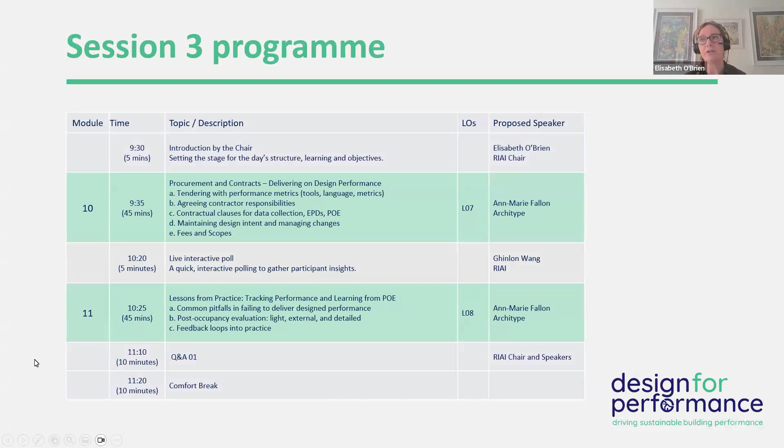Review assessment methods and deliver on building performance, and we'll conclude with a panel discussion on our next steps. You'll see the short agenda on the screen.

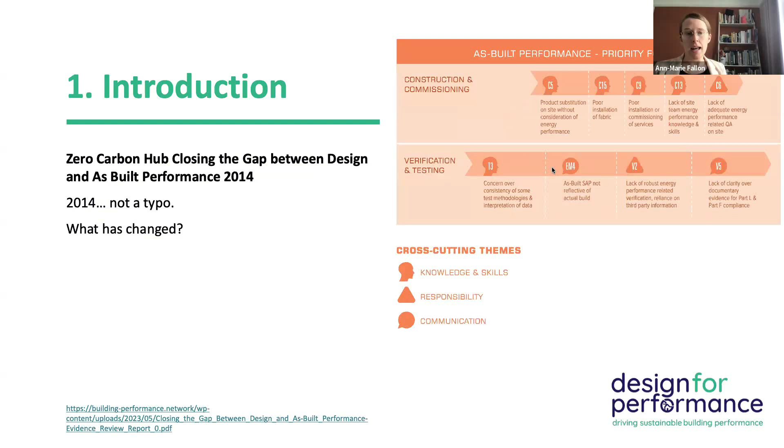The Zero Carbon Hub produced a report in the UK way back in 2014, which feels comical actually that now we're 11 years on and most of the same issues still exist within our construction industry. I won't go into detail on all the actions here, but it's a really useful report and scene setting.

It goes through several different topics that we will mention and run through today in terms of practical application. And interestingly, the areas that they prioritised in 2014 for research, there has been research, there is evidence of better building, better performance, better workflows now, but we're still seeing a lack of execution of that on the delivery side.

So, do performance metrics affect tendering? I'm sure in the big group that's listening this morning, there's going to be a variety of opinions and probably experiences of that. I'm going to be a bit controversial with mine.

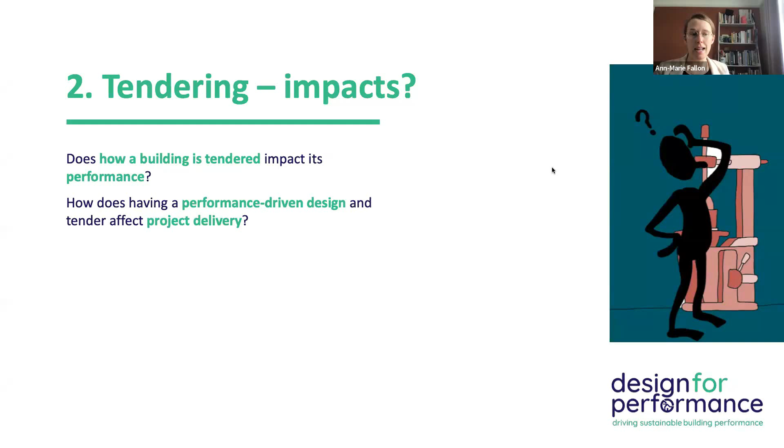You know, how a building is tendered, does that affect its performance? And how does having a performance-driven design and tender affect project delivery? I don't believe the tender procurement route necessarily affects performance in a negative way. The quality of the information we put together for that tender and how informed and collaborative we are ultimately is going to impact how that building performs.

The answer to the second question is also a positive one, which might sound quite controversial, but having performance-driven design at the center of your brief and creating that certainty as a client and as a consultant team gives confidence to the contractor and gives confidence to the execution element of the projects. And I believe you would have seen some examples of that in the last session.

Of course, this is an ideal world. There are challenges, and we'll run through some of those.

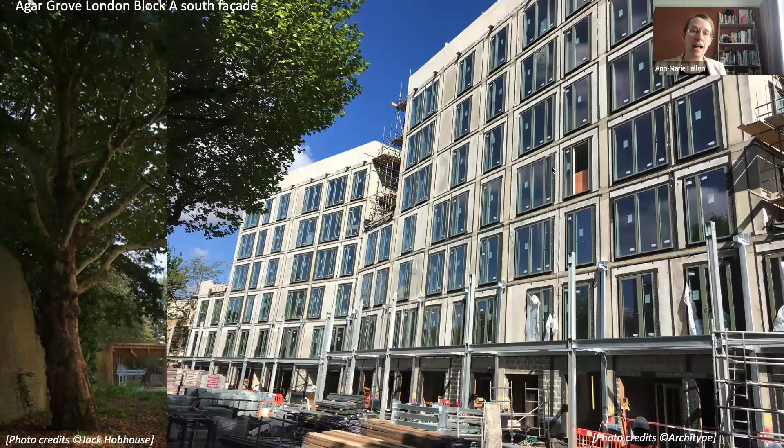Just coming back to Agar Grove here, I guess what's really interesting is, yes, you'll have the projects that are delivered and occupied, but behind the skin of those projects, this particular facade, the south facade on this block, had 7 to 8 subcontractors coordinating between the facade line, which is the thermal line, and the walkway, which was the kind of amenity area for balconies and terraces.

There were lots of panel sign-off protocols per level. There was thermal and fire performance continuity mapped across the project as well. This project was developed through COVID, Japanese knotweed, Grenfell, a lot of contractual issues thrown at the project as well as the performance targets.

And other elements of high performing buildings like the air tightness layer here and windows, etc., all build into that complexity of delivery and execution.

So straight into really, how can the client and design team create that great platform for then the contractor to come along and deliver on his obligations and responsibilities?

It might sound very obvious, and this might touch on some elements from the last session, but trying to make the energy target really explicit in all the client documentation. Where we find building performance fails and building targets fail in contracts and tenders and procurement is when the documentation is either not fully committed or there's an element of something referenced about energy in one place and it's not really followed through comprehensively through the rest of the documentation.

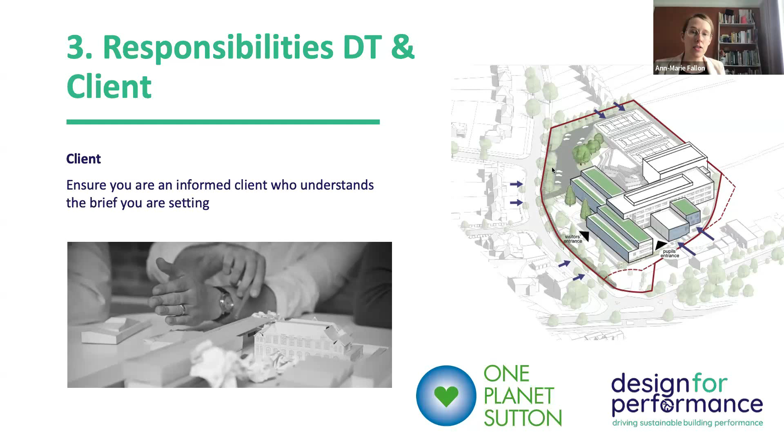And it was our first secondary school at that scale as well, about 8 and 9 years ago. So it was quite novel for all of us, but the client was so important in making sure that we were able to move forward with certainty.

Another area that's really important is around consultant appointment. We're in an infancy of where we're designing performance of buildings, and the framework that SEAI and RIAI have set out is there to help and handhold through that process. But we can deliver these complex buildings with teams that have not done it before. We've delivered many buildings with tier one contractors that have never done it before. It's all about the right approach and attitude and getting set up in the right way.

It really comes down to having a willingness to look across discipline and understand how M&E services engineers aren't just a tick-the-box service that comes in at the end of the architect's design. They're actually there to iteratively design your facade, for example, and look at how we're dealing with ventilation and comfort in the building. That is something that as architects we need to engage with, and they need to be able to step in on.

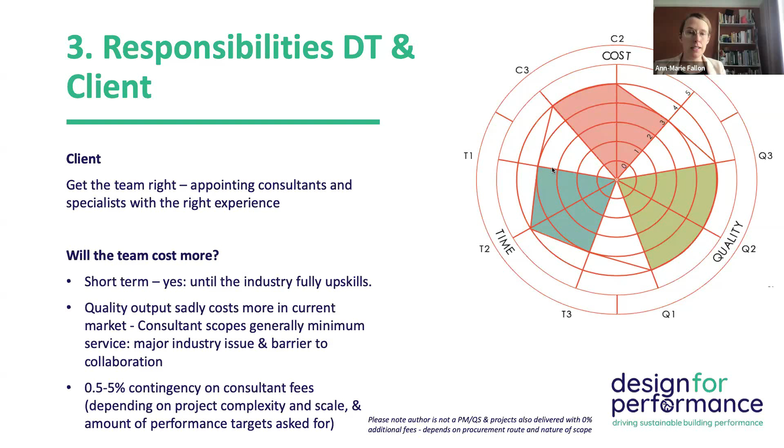So being accommodating, having that in your back pocket as part of your overall budget planning for a client, make sure there's no surprises, and you're informed about the complexity and scale and how much that percentage might affect you. And again, we're talking about consultant fees, not the overall project cost.

That said, having those contingencies, knowing what you're asking for, is so important to clients in relation to the contractual relationship when it gets to site. I've seen clients who've just entrenched themselves back in the business-as-usual historic position, which is: the contractor is going to be very nasty through this process and we need to protect ourselves and not really collaborate or engage.

Whilst maybe the start of the project started out very well. The best projects we've been on, whether they've delivered on energy targets, but the relationship with the client can be very different across project types, involve a client who has that openness and allows that contract to stay in the filing cabinet a little bit longer.

That generally, depending on the attitude of the contractor, which you should know through a very good tender and vetting process, generates how you might be able to best manage risk, intervention, or variation collaboratively. So just trying to keep the goals clear and keep that openness going as much as possible.

Some clients, and potentially design teams helping clients put information together, can be a bit nervous about committing to too much technical information in the tender. The more the better—getting in information about how you might imagine sequencing happening, air testing, the expectation around mock-ups.

Equally, these are things you might score or mark in a tender process when contractors come back to you with a return on tender. Making sure, again, they might not have delivered passive house, but maybe they delivered labs in a STEM context somewhere, so they know about quality assurance within a different type of approach.

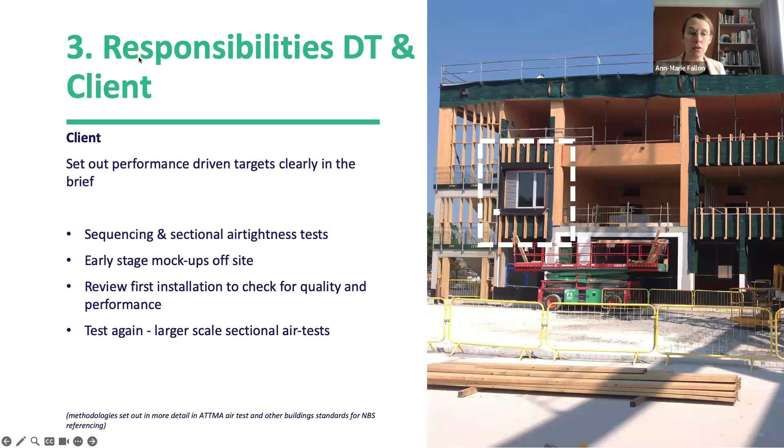Having evidence requirements, collating them, really reinforcing that cyclical approach—just a little diagram here showing that—allows that process to become a lot more collaborative and cyclical.

The start of every project does need to be generated from that in-use and 360 review that we generally have at the start of projects before we move on to the next stages, and trying to involve the whole design team and client team in that is really important.

And finally, for a client, locking in building performance evaluation. We'll talk about this more in the next session, but it's really powerful, and we can see the Scottish Futures Trust in Scotland have connected energy performance measures and targets with outcomes-based funding.

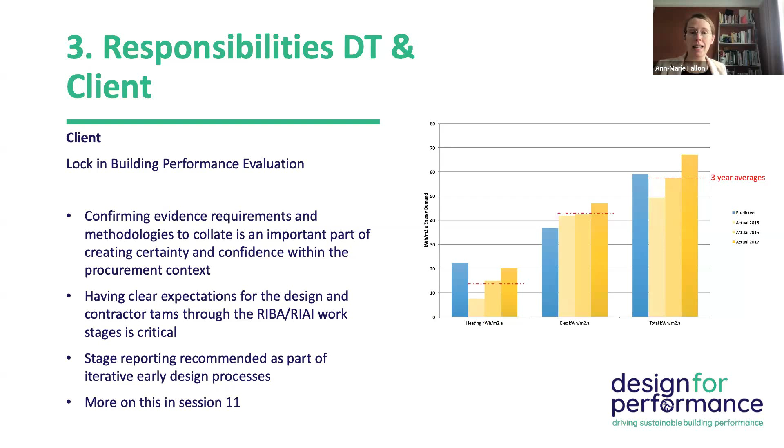So they don't get the capital funding for their schools upfront anymore. They get it over a 25-year period where the buildings have to perform to certain energy and other funding metrics, and post-occupancy evaluation is locked into that. Clients must provide that as part of drawing down that funding. So we're seeing clear mechanisms brought in so that buildings perform as designed by year 2. So just a bit of a summary.

We've talked about explicit targets, trying to have an informed client, and that can be very difficult. Sometimes we're lucky with really informed clients who know how they're spending their private or public sector money. Other times we're dealing with people who are a little bit remote from the technicality of the process. Especially at this early stage of driving through this change, it's a duty to really engage, collaborate, educate, bring people to sites, bring clients along, and get that engagement—it helps the collaboration the whole way through the project. The design team.

Coming back again to scope of services—so with the client to set their information up as best they can, how are you responding to that? I guess it's a topic architects debate quite a bit, how we present and replicate information, the cost and time for that, and how we contractually become implied within what we're showing at different work stages.

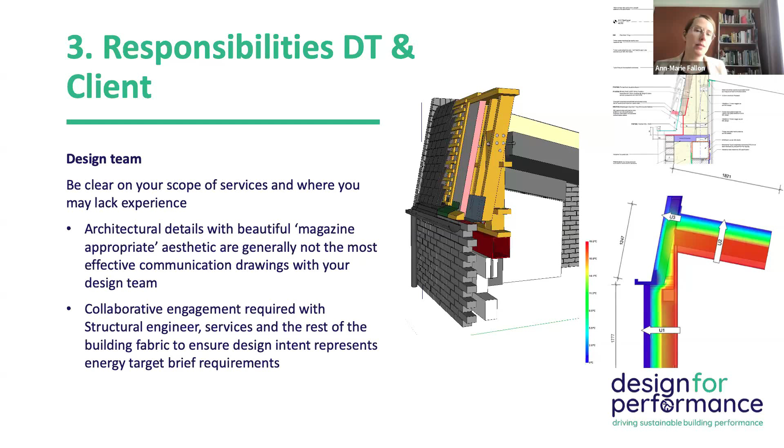Maybe if we had engaged in some modeling a bit earlier on, or were able to do some 3D mock-ups digitally to demonstrate the complexity on site, and if we had the right people around the table—which at this particular point we didn't—it could have made an impact. So again, being really clear on what we're actually providing at different stages. That extra thermal modeling wasn't in our scope at the time, but with our Passive House designer scope, if that had been sorted on this project a decade ago, maybe it could have been drawn on in a more collaborative way.

Design team as well as the client—when we're working on these projects at the very beginning, there are many consultancies and different experts across Ireland now, particularly because of NZEB and the Part L regulations being slightly ahead of the UK in a lot of instances, so there's experience within the fields we're working in. Even if, as an architecture practice or consultant practice, you don't feel you have the experience in-house, for those first few projects look at it as a bit of an investment to bring in and develop relationships with some of those consultants.

So really trying to think about, from the very first beginnings, don't just get a consultant in to do a tick-the-box exercise. Bring these designers, bring environmental designers in as early as possible, or develop them in-house, to ensure you're making the right early stage decisions that don't allow for these impacts later.

I'm just showing this in terms of free information available. I was with Joseph Little Architects many years ago now, and just as a performance target around retrofit was developing with the Passive House Institute, we maybe naively committed with this client to delivering that developing performance standard as it was evolving out of Germany at the time—the EnerPHit, Passive House EnerPHit standard.

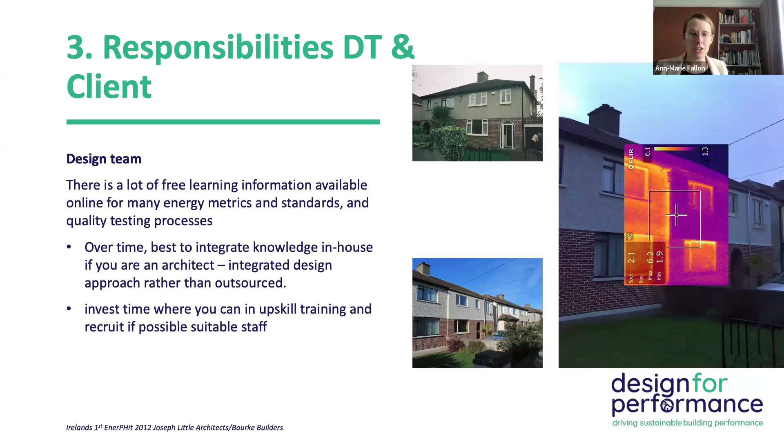It's absolutely not a barrier, and since 2011, 2012, there's so much more information online, and the curriculums are changing. I can see in the UK moving towards more energy conscious building physics undergraduate curriculums, particularly in architecture. So that kind of 2010, 2011 Part 2 assistant architectural graduate is a lot more informed now.

So just to summarize, being really clear on the scope of services, looking for that experience to complement your experience, and trying to avail of the training and learning that's out there, I think is a really good first basis. And we can talk about some of the technicalities of how that runs through in quality and contractor sections.

Again, novel project, inexperienced contractor, mostly inexperienced design team. Lots of really ambitious energy targets. So it did feel a bit tick the box with WELL, with BREEAM, with Passive House, and all of the other bio-based and low embodied carbon targets the building had as well, and reuse and circular economy.

So it was a very ambitious brief, but really understanding where the brief was and who had primary responsibility for the different elements of the brief in a collaborative way was the success of that project really.

And there's lots of information. University of Cambridge have open source lessons learned on costs, on the sequencing of this project, and how the teams collaborated, all online. I'll try and pop it in. I'm sorry I don't have it in this slide at the end of the presentation.

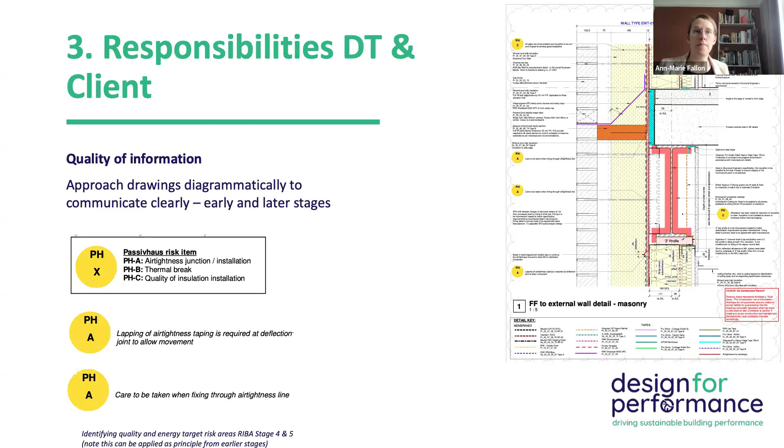Sequencing. Again, I've had a debate with architects in the UK: if you can't draw detail in 3D, or your team can't, how can you expect the contractor to build it? And whilst, in a D&B context, we're handing over that responsibility to the contractor, having a set of sequencing drawings is a really collaborative way of approaching their supply chain with the main contractor and saying, right, we think this is going together like that.

Here's our detailed drawing. What do we think? Whose responsibility are the different layers? And actually, is there a better way of doing it? Because sometimes that can come back from the supply chain and it can save cost and time.

And I'm not saying radically change the intent of the detail. The strategy remains the same, but there might be a sequencing change that facilitates everybody on site.

And also with our NBS, we have a specific passive house or particular energy target prelim set within that NBS that's referred to and coded on our drawings, within the world of BIM and information management, that allows everything to be coordinated and tagged across, so that there's no excuse for any package to be procured by the main contractor that their supply chain is not aware that the passive house or a similar energy target is required on the project.

So explicit targets, bringing people along in a series of workshops, setting that charter around quality of information and who's showing what. Designing with services in mind - we'll come back to services as we go through - and how we interpret and deliver on information is really important, and how much we actually show it.

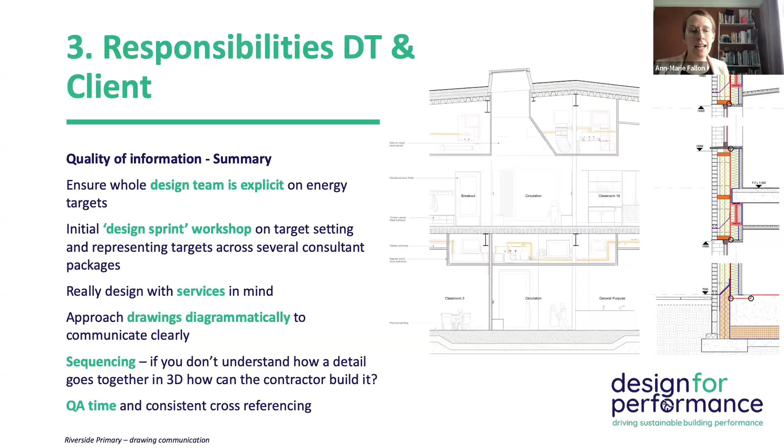So I just have two quotes, one from a report and one controversial one from a contractor, and it depends sometimes on the day whether I agree with them or not. So I'm not saying this is...

true for everybody, but tier 1 contractor - the responsibility of a successfully delivered high performance building is 80% the design team and 20% the contractor, after delivering several passive house projects with several different consultant teams and clients.

And I guess as an architect, I'm a bit upset at that - of course I'd like that percentage weighted a bit more towards the contractor. But I do really believe, if we can give the foundations as the design and client team for clear information, really clear targets, really informed collaborative working relationships, that the contractor is really just executing what is a really good pack of information, and quality and execution should be his remit in terms of how good that workmanship is.

But we know the balance can be very different, and sometimes the design team maybe isn't quite at the grade A level of delivery or experience, and the contractor is taking on that little bit more risk in the building information. I think we'll find, as we move through the first major projects towards 2030, that we're going to have to develop that relationship to better understand what that contractor needs and what, of course, you're being paid or scoped or assured to deliver.

And of course they're quite important topics - again, I'm not pulling out the Hackitt report here, but the Cole report on school quality, or public sector building quality in Scotland - the irrefutable evidence that third-party certification of construction is really critical to reinforce quality.

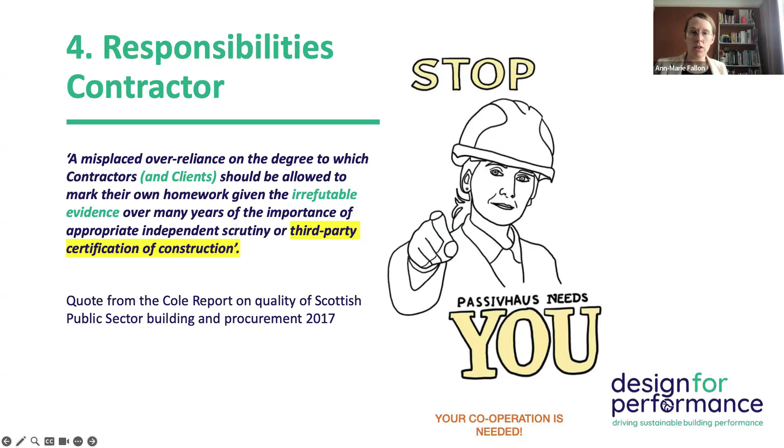So we're seeing the impacts of that come through now on a performance-focused basis. And in Scotland at the moment, they're looking at a passive house equivalency for domestic and non-domestic buildings to be rolled out by 2028 within their building regulations. The idea of certification is something their building standards are trying to work through - how can the building control teams take on some of that performance-driven assessment alongside their other requirements?

So the few things I'll talk about through this period is what contractors can be considering.

This is lessons learned and feedback from contractors. I have to credit them rather than just me in this section - their experience, their feedback, what they think we need to be doing to allow them and the team to deliver a successful project.

So having that pre-con bid stage - maybe a contractor comes in later in the project, when the design is very developed. The case study I'll go through today is when they come in actually a lot earlier. I know typically architects balk at that a little bit and think we don't want the contractor interfering with our design too early. But I believe to move forward on data-driven, performance-driven design, engagement is really good at any stage, particularly early stage.

So if you have a contractor in early, even if they've come in at detailed design stage, they need to be really preparing well on that pre-con stage for reviewing drawings - not just having a commercial view of what they're looking at, but really having their own internal support on energy requirements. Having that really well set out information, clearly delivering energy performance targets, helps and assists them in that pre-con stage. They also need to really manage who they're employing and training for standing over those quality areas.

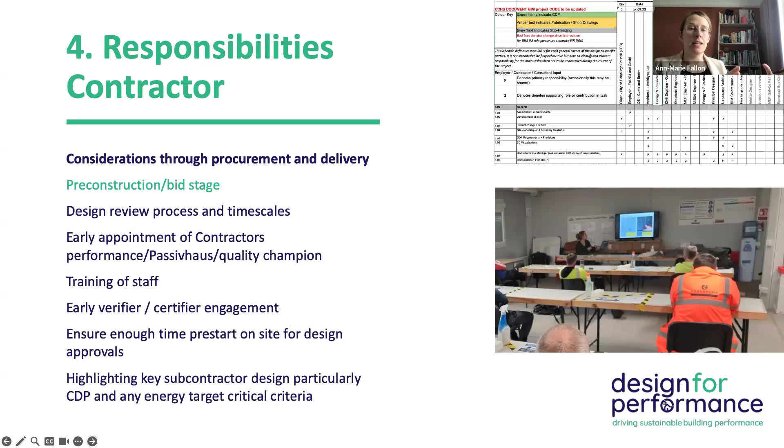Whether it's a quality champion, passive house champion, air tightness champion - all these different people that can sit within the contractor team, their upskilling for that and recognition of that, depending on the project scale, is really important. And if there is certifier or verifier engagement, who that is, do they understand the process, and allowing that pre-start on site time for extra design approvals. Their pre-start program should be a little bit longer, especially on the first few projects they deliver, to allow for time to make sure we get that certainty, especially with subcontractor design.

It's important that they can influence early design decisions where possible. This is an example of one of our projects where we were doing the first steel frame project to passive house standards in the UK, and the detail around the windows changed slightly because we had a thermal bridge requirement. We also have a fire continuity requirement, and we have air tightness and vapor requirements.

So we did a sample window on site. We took the detail with us. We all stood around collaboratively, had a discussion. The window supplier was there, the air tightness champion on the contractor side was there, and there was an evolving testing and sampling of how robust we could make that detail, given just the novelness of the detail and where the window had to project in order to be thermal bridge free.

So making sure that we can have that engagement, identifying those key details, reviewing that against all the targets that they have anyway. Even the contractors themselves are very keen to avoid material substitution. We'll touch on it in a minute, but if they're told a specification of a material, and if there's competition in that market, fine, they can go and look at whether they can substitute something. But really they don't want to take on that liability - they look for engineering value elsewhere than trying to interfere with the performance-driven parts of that building fabric.

In terms of procurement, they feel quite confident that if we have an enhanced package from the design team, because it is performance driven, they've had to put lots of criteria and detail into drawings or specifications in order to prove they can deliver that at design stage. That gives them some certainty within their early procurement talks with their supply chain. It still might require some additional QS resource and understanding of logistics and sequencing, but that's their bit of responsibility to build that in, especially for large complex projects, to make sure they allow that program time.

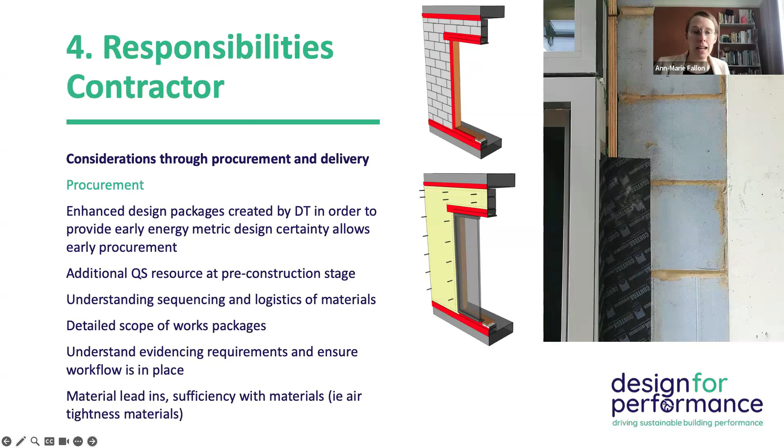Sufficiency with materials - this example here, we developed a bit of sequencing as part of the tender process. Also, if we can get away with a thinner airtightness tape - airtightness tape is expensive, and there's kilometers of it on certain projects - how efficient or sufficient can we be? Having those early chats, knowing the contractor's aware of the quality required on site, maybe they can get away with a 60 mil wide tape and not 120, and have those discussions early on.

Program planning - we talked about an early on-stage start-on-site period, so as a design team we need to engage in that and be encouraging of it, working within that process to save on any kind of issues later on. Air testing and designing for performance is super important, and having a methodology, knowing what you're doing especially on large scale buildings, is really important for the contractor to have that in their program planning.

It's something we talk about from the very get-go. We might not know what the kitchen design is yet, or how it's going to be procured, but we're already talking about air testing and saying how are we dealing with this. Here's a workflow to deal with it, here's how we think you need to incorporate it in your program. Generally we get quite a positive response, because you're supporting them, saying look, you might not get the test the first time.

How can we support you in that? Do you need to hire a blower door fan so you can do some localized testing? Can we create a mock-up area in the building within our stage 4 design, and allow you to do a small partial test much earlier in the project? Starting that conversation, creating ideas, creating support allows for that to be accommodated - allowing the right resource, we'll come on to that later on.

Importantly, in terms of program planning, what we're finding is there's maybe a bit more upfront design cost with contractors' design proposals, like CDPs, earlier on than contractors might like, and that can be a bit of a change for the supply chain as well. But I think it's really positive if the contractor can allow a little bit of contingency for some upfront design, because it does really help later on, and they will save on efficiency and time later. Of course, their commercial QS at pre-con stage might not be able to identify that formally, but your experienced design manager later on is going to realize that this makes absolute sense.

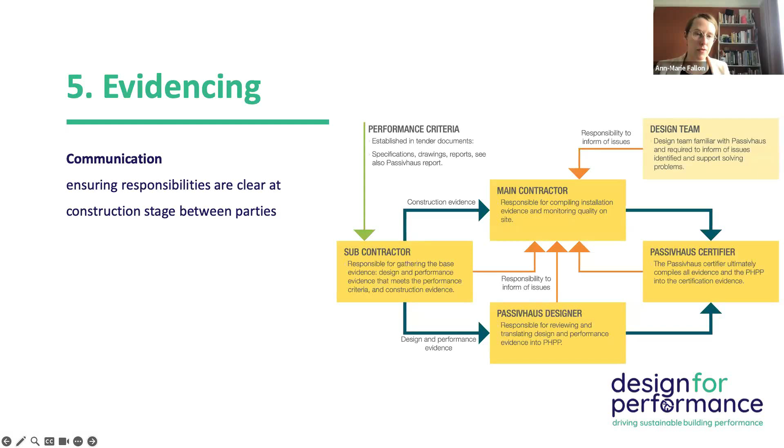Okay, yeah. So there's different communication workflows we can look at here for containing and delivering evidence around performance criteria, and managing on site with different toolbox talks, getting manufacturers in, a no-blame culture etc. is really important. This is an example of Willmott Dixon and Harris Academy looking at evidencing for Passive House on the first secondary school, where they were able to tag areas that evidence was to be provided, agreed in a collaborative way with the design team and the certifier, which allowed them to move on through their projects.

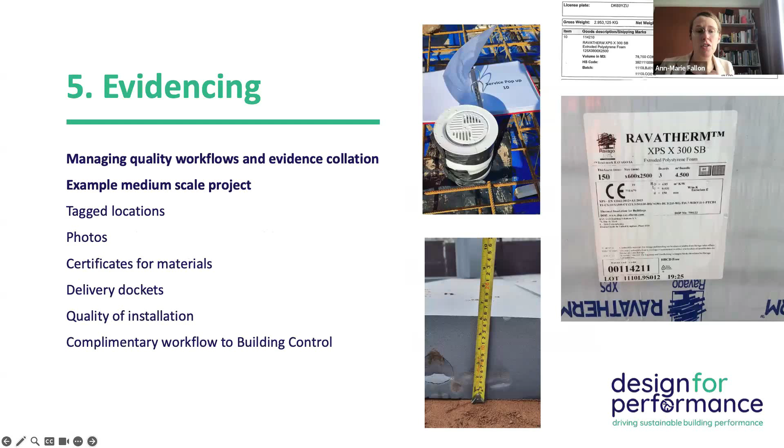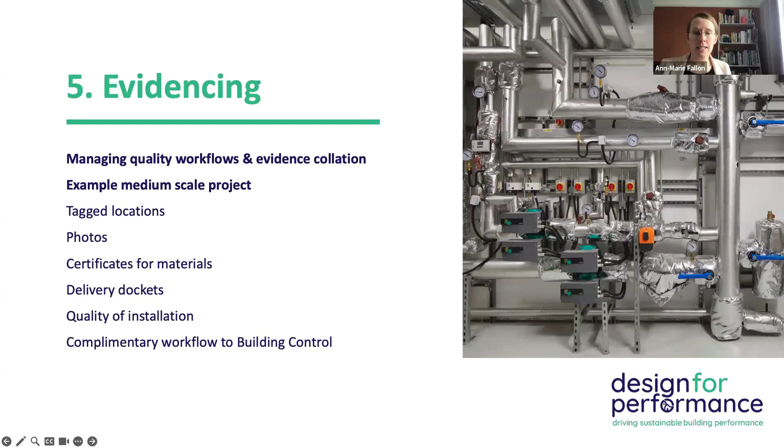And then just looking at quality and workmanship around insulation, and what we can accept and not accept. Again, love a good plant room with really well insulated pipework and ductwork, and we can see a really good example here from Harris Academy.

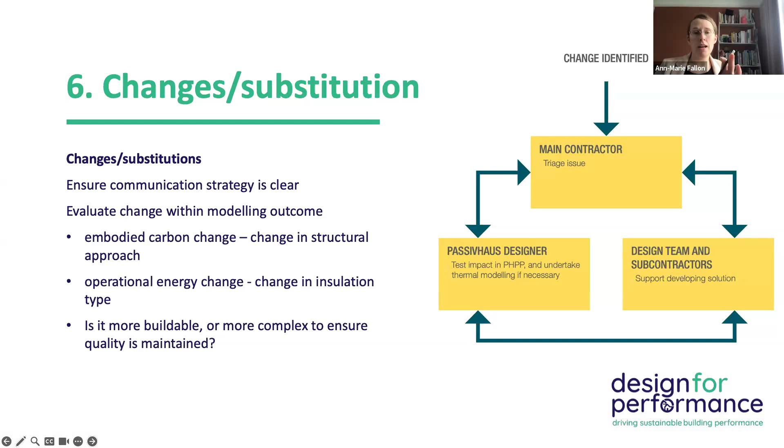If we've specified insulation on MVHR ducts, architects can pick up and observe these things, liaise with their M&E engineers and the contractor, and ask the right questions, even if you're not very sure or don't understand in detail that type of information in front of you. Changes within the supply chain and substitutions are absolutely fine, but there's modelling outcomes that might need to be tested, whether it's an embodied carbon change or a heat loss change in relation to operational energy. Establishing that clear workflow and baking it into how you move forward in meetings is really important.

Here's another example: we can move from CLT to a complex arrangement by the contractor, which we've discussed earlier, and that can create cost, time, or buildability issues that we need to try to rectify as we move through the project.

I'll spend the last couple of minutes talking quickly about the case study and how we applied some of those things across Riverside Primary School. The design team is there for you to reference later, along with the client team. A 500 pupil school, £20 million, designed through COVID over an 18-month build period before we got to site. It was Scotland's first passive house primary school and first steel frame passive house project. The contractor was inexperienced, the design team was inexperienced, the client was inexperienced but ambitious with their climate emergency policies around 2019.

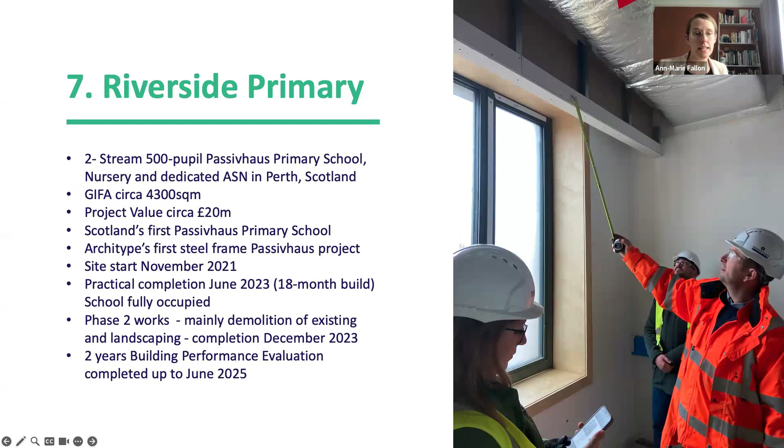A lot of what we've just talked about was applied from the very get-go with this client, post-Cole reports context as well in 2017, where quality was being criticised across the public sector. Really holistic employer requirements, cost certainty, clash detection, coordination, collaboration - we were the passive house designer and the architect on the scheme.

It was complicated as well. It's a tandem build - there was an operational school on the site, so there were phasing challenges with that. And there was value engineering, so unfortunately the project went from CLT to steel frame. We had a bit of design change where this clerestory was removed, which I think was a little bit of a shame.

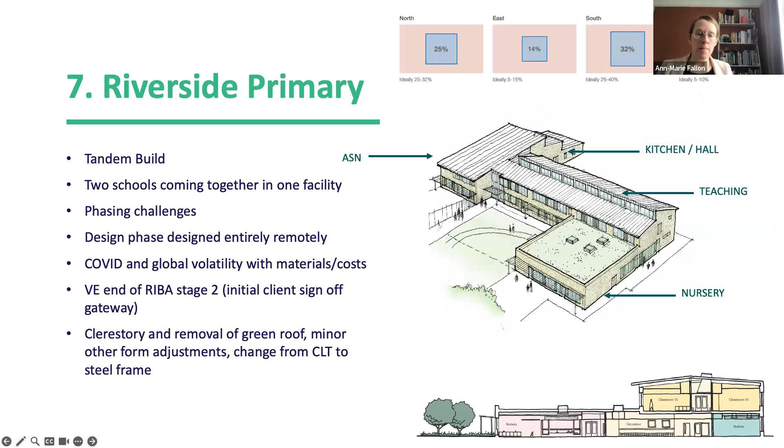But we were able to compensate with some nice roof lights and the green roof, which again was just covered in PV later on anyway, so it was less of an issue. This shows the revised massing in relation to the tandem build and existing school that sat behind, with just the nursery needing to be demolished for that period.

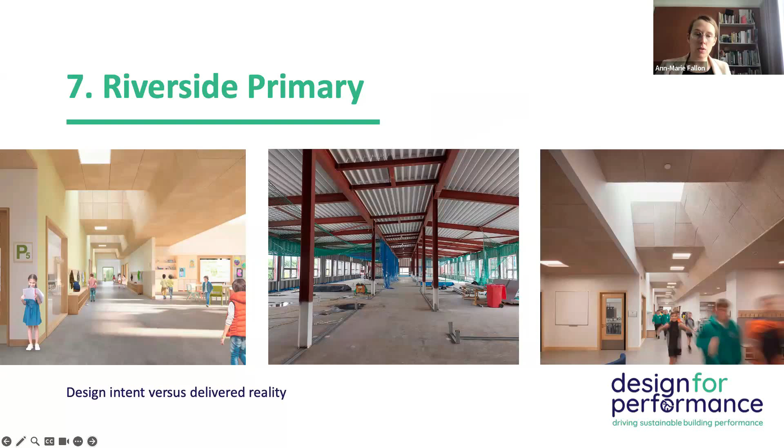Design intent for building performance can get delivered through to reality - we did have to go through a VE process, but we were able to uphold a lot of the low VOC materials we specified and recycled materials. The in-use performance of this building, now at the end of year 2, is down to an EUI of 35 kilowatt hours per metre squared per year.

We anticipated a higher EUI - we were quite conservative through the design stage. The operation of the building and the collaboration of the POE afterwards was really powerful to deliver 44 in year 1 and 35 in year 2, which goes beyond all net zero and RIBA LETI climate targets.

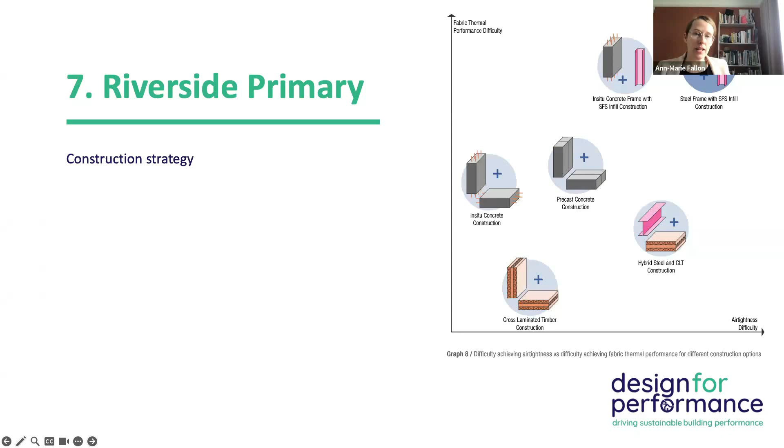The construction strategy was steel frame - it went from CLT, and we think there's increasing complexity with steel frame. I've done a technical position paper on this from the Passive House Trust, with some really useful information from the client, contractor and design team perspective, and the certifier perspective too. Really useful to download that.

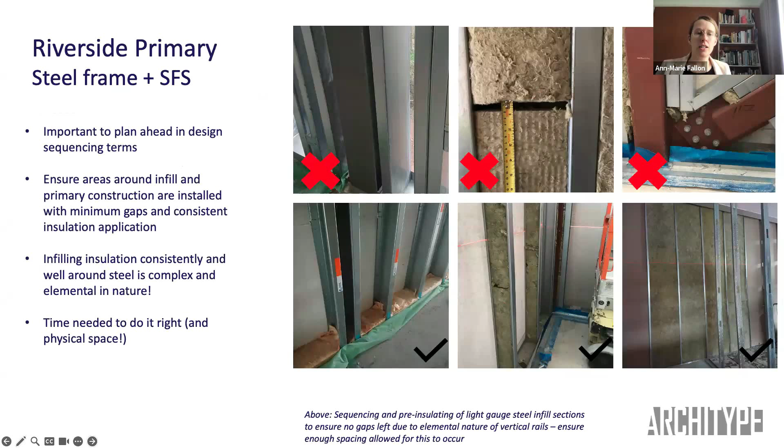There were various complexities with the steel frame that I covered in that document, which we don't have time to go through here, along with lots of pros and cons and how we can manage quality on site with steel frame.

There was a lot of innovation in this project around hot water design. We worked collaboratively with the M&E engineer and the certifier to bring down the hot water consumption and losses in the building, and there's been no complaints about that since on the client side.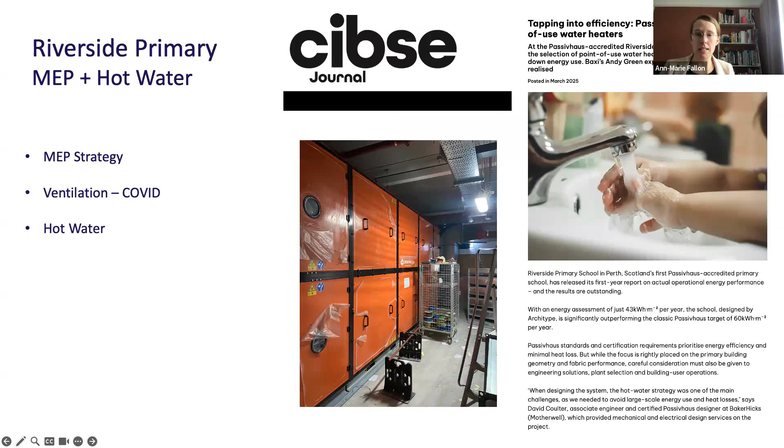The one thing I want to pick out here, which is a lesson learned from the client - a really collaborative client - is that for PVs to make targets, we need to think about what that generation actually does. Does it go back into the project or not? They didn't even need the PVs to meet the EUI targets they set for this project, which is really great. Then there's the issue of oversized incoming loads - we should reflect on getting that calculation right within the contract at the very beginning, because standing charges to the client can be quite significant over time.

We have embodied carbon targets for the project, happy to discuss that in the Q&A. I know I'm running out of time.

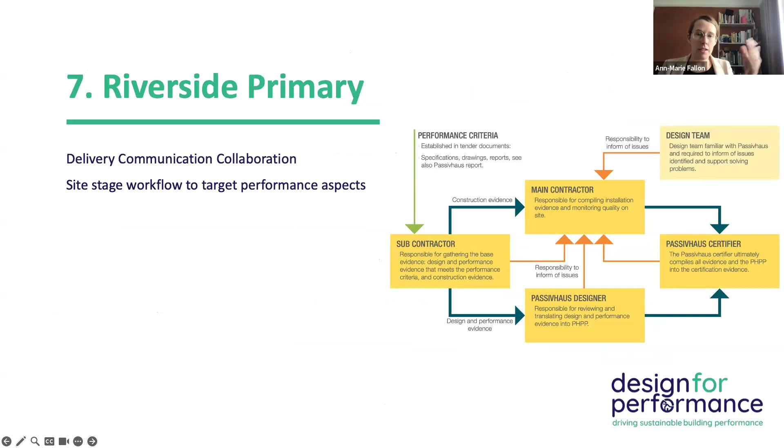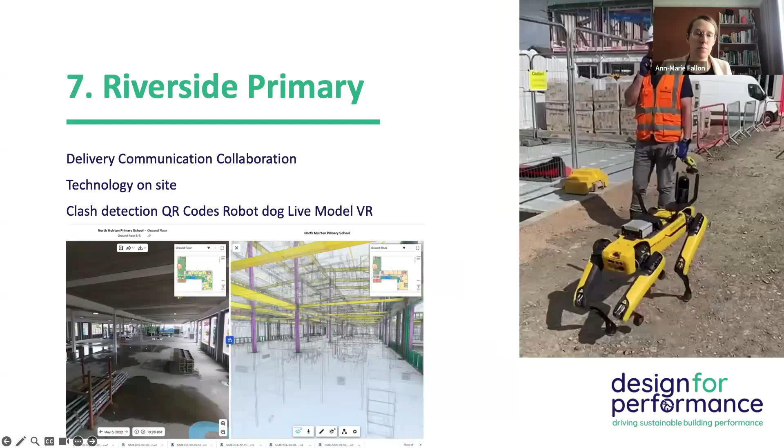We use a lot of the information you've already seen through the presentation - site posters demonstrating awareness, highlighting things, so someone having a smoke in the smoking cabin on site would be reading about Passive House. Toolbox talks, inspecting sample areas before the contractor moved forward. We're the architect, the passive house designer, so we do need to come out and review and inspect these things. There was lots of clash detection and digitalization on this site, with thanks to Heriot-Watt University for the robot.

Some other feedback: the program was 72 weeks, only 4 weeks longer than initially anticipated for a non-performance driven design, with the extra 4 weeks added for the on-site start stage. There are no defects, and it's the first building in 25 years where the local authority hasn't had to go back in the first year to fix a leaky roof - which I find absolutely appalling that the public sector spent all that money for the previous 25 years on buildings with leaky roofs.

POE will be covered in more detail in the second session, but we also looked at the overheating resilience of the building. Any issues that came up during the POE period were easily rectified because we'd already established a really positive relationship with the contractor, the client, and the design team - everyone just wanted the building to deliver these results at year 1 and year 2.

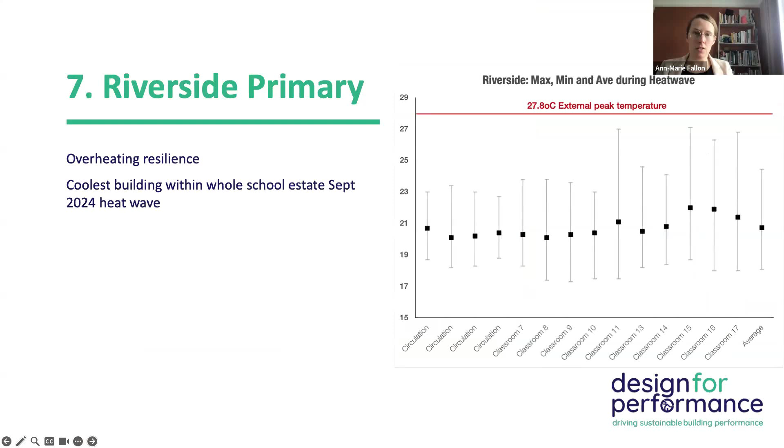So just to summarize, this project gave really good insight, which I hope I've illustrated through the presentation. Understanding collaboration really underpins all of that. Of course we want a building to be really well loved - that's what we're doing in the construction industry. We want the building to be popular, invested in, and create a good presence within the community. As architects we're proud when a building wins awards, but it also shows the influence and reach of projects designed to deliver on performance, and just how novel that still really is.

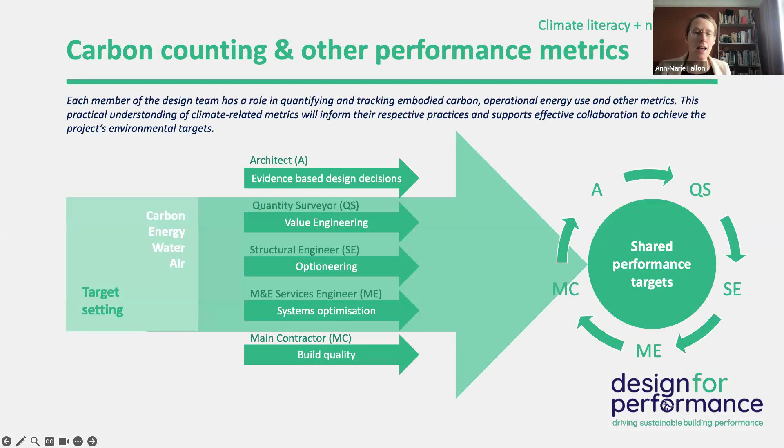Coming back to this last slide - we can pick this up in Q&A - we tend to approach projects in a very linear way. I hope the presentation has demonstrated that we really need a cyclical relationship between us, which may affect scopes, expectations, and the level of collaboration you're used to. But it's about relationships at the center of all this, not the contract, in my belief. If we can leave the contractual side in the filing cabinet or on the digital portal as it is now, we can all work together to deliver really good buildings. Scotland is already well mobilized to try to equip everybody for that and create the collaborative relationships we need going forward. So thank you.

Sorry if I've run on a little bit.

Just to recap, you've gone through the responsibilities of the client, the design team, the contractors, etc., and shown the importance of collaboration at an early stage. That's key for collaboration - starting early and continuing through the whole implementation of the buildings to get good quality results. I think our next presentation is going to look at lessons from practice and learning from post-occupancy evaluation, POE. I'm going to let you take over there, Ann-Marie.

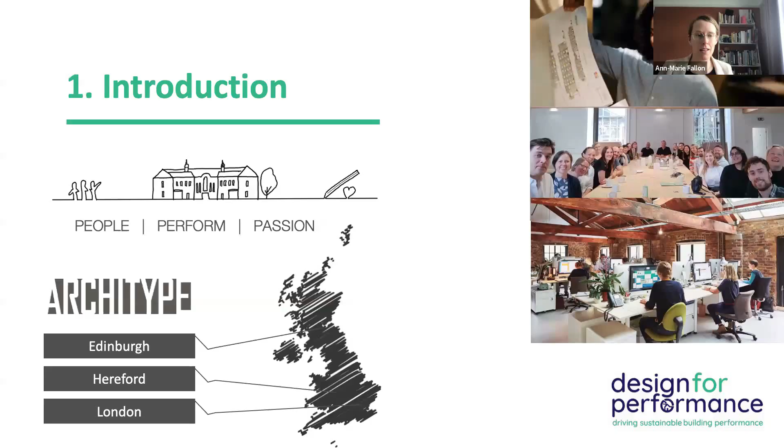40 years ago, it was a little bit light touch, kind of we're into natural materials and sustainability, but we don't really know what that is. There wasn't a lot of guidance or targets or information out there at all at that stage. It was more like a movement, kind of the passive solar coming out in the 1980s, late 1970s.

As we've moved through time and focused on energy metrics and performance-driven design, we've really driven that down to, well, actually now 35 on our Riverside schools, one of our lowest best energy performing schools that we have. It's just a really positive pattern.

And I guess just as a set of consultants, that's where we're trying to move towards. It takes time - it's taken 40 years for us to get there, and maybe the last 15 years to really bring it down to really exciting levels. There's retrofit and all sorts of other stuff in there.

So just being aware of how your buildings are performing, getting that understanding is something I come back to later on.

So we hear a couple of terms thrown around about POE, or as I call it, BPE, a building performance evaluation. I really think we're moving from the post-occupancy evaluation tag to a more holistic tag around building performance evaluation. There's an out-of-dateness here and a bit of a movement forward where we maybe rebrand or recategorize this into more correct terminology, which is really bringing building performance into everything that we do as architects and designers and contractors.

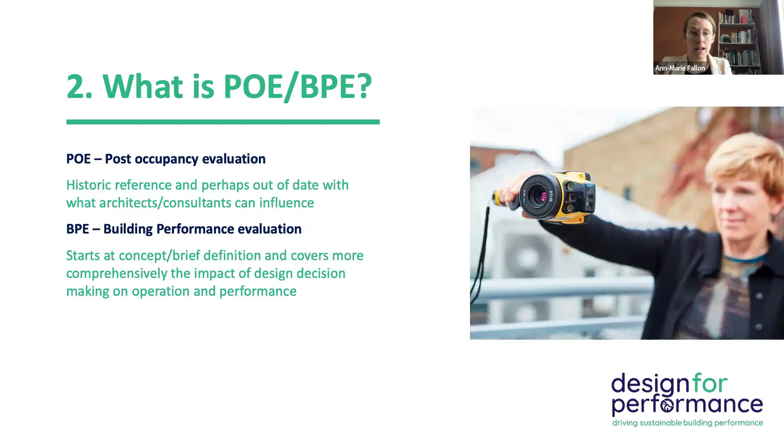We bring it into what we're actually delivering, so whether that's at the concept and brief stage or the post-aftercare monitoring of how the building is performing, it really all starts at the concept stage to get it right.

And I'm not just making this up - this has come from the Methods of Assessment, BS Standard 40101 from 2022, and outlines in detail a lot more information than I'm able to fit in today, but it's a really good reference point for starting off on this journey of knowing more about this and hopefully being able to offer it, or maybe doing a bit of self-exploration on your own existing projects.

So what does it really, when we break it down, what does building performance evaluation really mean? And how are we doing it? Okay, so there's a couple of different headings here.

We have qualitative feedback from building performance. We can do that in a variety of ways with the users, with the client. Maybe it goes back into the site stage with the contractor, in terms of lessons learned, but it's quite subjective and it's quite focused on the experience of the individual. So ensuring that we're able to capture that, because ultimately we're designing buildings or retrofitting them for people to use them.

That is the fundamental part of building performance evaluation, as well as the measured metrics. We also want to make sure the building's comfortable, enjoyable, and really suits and meets the brief. We have then observational - so we might go, as a consultant, into a building for a series of days or hours or at key points within that building's operation to look at how it's being used. Personally, I find this work really exciting because you're really figuring out, is the building performing or failing?

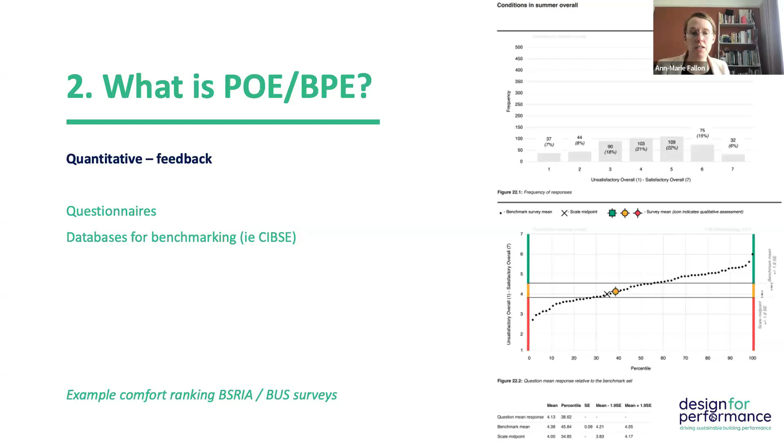And of course then databases. So if we want to benchmark building performance of a building, we can go to CIBSE. We'll have a whole host of different performance benchmarks for all sorts of different stuff, whether it's individual lighting load or overall building performance. We also have observational quantitative parts of the building.

And again, this is all building into what the scope is for POE, where we can look at space utilization, and we can tie that into movement surveys, perhaps, of people moving around the buildings. There's all sorts of different ones that we can look at that give us some hard evidence of how a building is behaving. This is an example I'll come back to later from Plymouth Marjon University.

And then, of course, what we're more familiar with hearing about BPE being is energy monitoring and environmental monitoring. Ideally, we have that for a period of time. We can focus on a period, a range of different metrics - temperature, humidity, CO2. We can also go down into particulate assessment and VOCs, and pick up things around lighting and all sorts of other stuff in that too.

And we can access that in person or remotely, depending how much you want to invest in a fancy platform or data loggers, how digital you want to be with it. And we can refer to different reporting methods. How we might report on POE and how we want to present it is all very well established in other guidance documents that hopefully you can pick up.

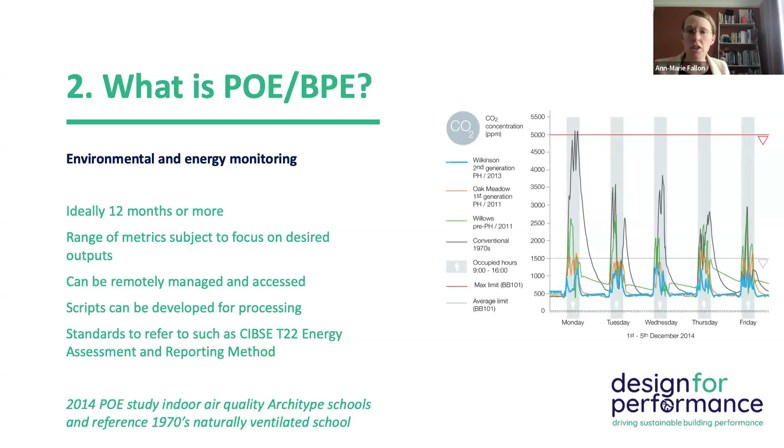This is just an example from one of our schools where we've referenced it against a 1970s naturally ventilated school. It tracked how our buildings were performing over non-passive house and passive house schools over a period of time. And we can see that the CO2 in the passive house school is a lot more controlled and regulated than in the older 1970s reference building. So this was part of just general self-reflection research, and I'll come on to that in section 4 again.

So in the UK in particular, there's an explicit obligation, which I don't believe exists in Ireland yet, and someone can correct me if I'm wrong, of chartered architects to inform clients of the benefits of building performance evaluation. So we're obligated, which I guess isn't a must in terms of contractual language, but it's an obligation there and a kind of duty, I guess, of our service.

And the obligation is to offer this as an additional service. So it's kind of written in that this isn't something we provide as part of our overall architectural scope - it's an additional element. And there has been a bit of concern around this, from PI insurers and architects, and there's been a couple of different guidance notes from RIBA on this as well, around where people sit.

And yes, Architects Declare, the climate action group, call for this to be included in all scopes - we should be doing this as a matter of course. And whilst I also believe that, I think we need to be building up to that. Looking at this cyclical representation of how we design and collaborate and bring things together, every building's strategic definition, the RIBA 0-1 stage that you guys would look at, is the post-occupancy and the 360 lessons learned should feed into that. And we see it all the time.

It just doesn't happen. We're not learning the lessons. There's a different client, there's a different contractor, maybe staff changes. How we embed lessons learned in our organizations for everybody to access is still a big challenge.

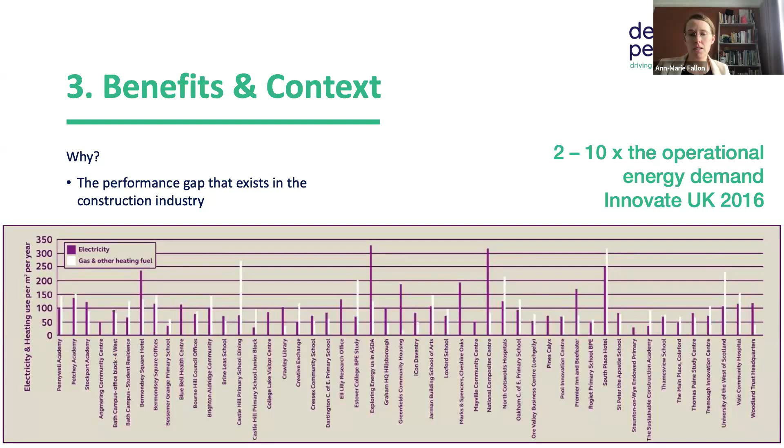We can see from various studies in the UK, especially through housing, that there's 2 to 10 times the difference on operational energy demand. And CIBSE has also come out and said 3 to 5 times overall. Beyond just operational performance, there are lots of performance gaps across different parameters.

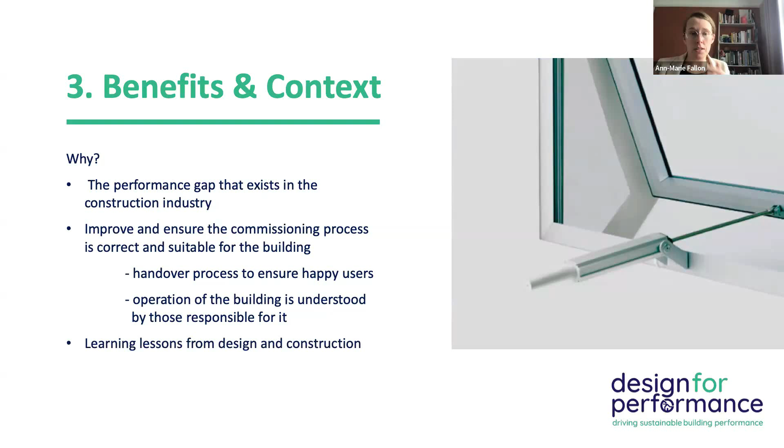And finally, learning lessons from design and construction. So we looked at the opening windows in the last session, around how much free air can move around that window, and how what we might decide at design stage is very different when it comes to reality. How then does the user interact with that? Do they really even open the windows that much? And we can actually create data around window opening as well, depending on what we want.

Then there's the bit that, as architects or designers, we can be kind of excited about, or maybe have no interest in. I know plenty of peers who aren't really interested, once they've won all the fancy awards, in how the building's actually performing afterwards. I think that's the greatest failure of architecture, if the building isn't performing and we don't really know about it, or we're not engaging with it - given the embodied carbon, the investment, the footprint, the physical space that you've taken up with that building. So making sure that we understand the design intent follows through into reality is really important.

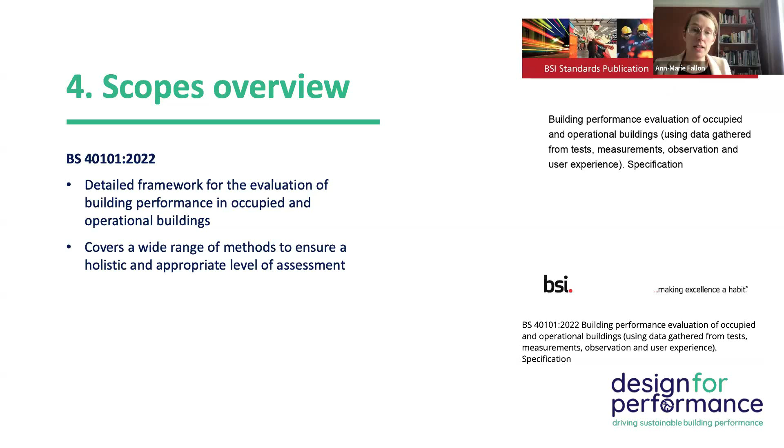So I've referred to this already. BS 40101 is going to give you a lot of guidance on this, and I'm just going to give you a bit of an overview about how we've interpreted this standard and how we think it sits in a different series of scope of services.

So what we need for building performance evaluation to really work is deciding what type of assessment we want to do. We might want a mix of both here - qualitative assessment, some workshops, maybe no observation, maybe just a questionnaire, for example. And then we might want to do some quantitative assessment - so energy monitoring, looking at water, for example, and looking at energy use or energy generation on the site.

But of course, all of that is underpinned by having all the right building information in the first place. And when we do this on existing buildings, it can be a challenge to obtain that information. We might need to do some existing or additional surveys to get the right information before we start, so we can touch on that again.

And if you don't have that information and we need it, we might need to go for an additional fee or piece of work to ensure we have it, like a survey or something similar, especially with existing buildings.

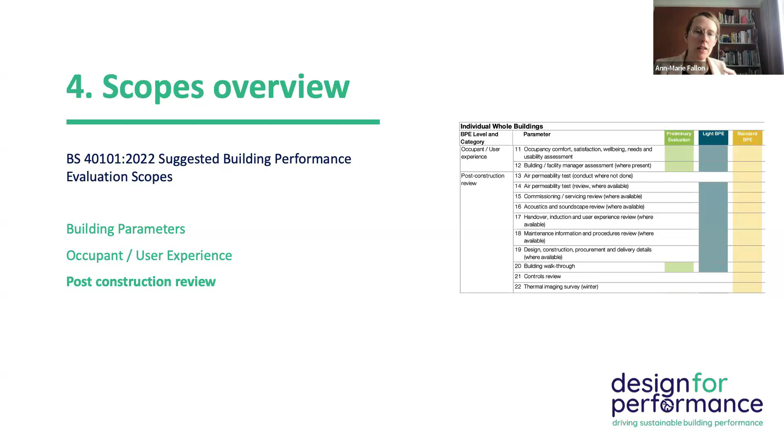A lot of this responds to maybe recently completed buildings where there's a lot of that information available, and having a review of controls. Perhaps at this stage as well, being able to do a thermal imaging survey. So if there's a fabric issue with the building, or a concern that it has a lot of heat loss or potential building failure, having these forensic tools available is really valuable.

And then finally coming down to some of the more typical things we think we do in building performance evaluation, which is around monitoring, and that includes water and overall energy coming in and out of site. So how we categorize that.

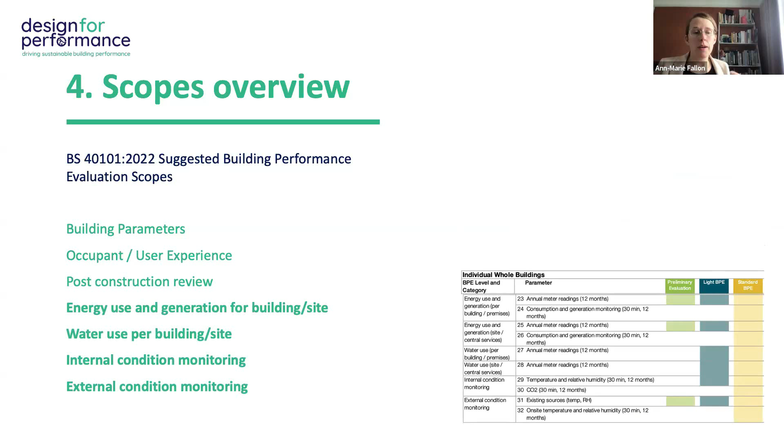You've seen that I've just had a level of service across those different parameters as we go through, so I'm just going to come back to them now. A level 1, light touch - what does that mean for you as a designer or as a client? It's mostly qualitative.

We're looking at occupant user experience. We're not really diving into the detail on the technical, so air tests or building information like drawings and how it's performing maybe not so much, but we can do a little bit of metering and we might look at some external monitoring of temperature and seasons and that kind of thing.

Level 2 is a bit more standardized. So we do take the building information into this as well. There mightn't be an air test available, for example - there might be one or two things still missing from that - but we are looking at metering and more internal condition assessment. This might pick up water use, for example, or breaking down the energy that's used in the building.

And then finally, the standard BS 40101 recommended level of performance - building performance evaluation - is much more forensic. It really goes through the detail of how the building got designed, what were the design intentions, and then how that was executed in reality, tracking physical performance like thermal imaging and air tightness, as well as all the softer bits around the user and occupant experiences. And again, the quality of that really relies on the quality of the building parameters you've gotten in the first place.

Always on everyone's lips: what does this cost? What's the scale and range of our input as consultants? The really annoying answer is it completely depends on so many other things and what you're really looking for, because this list in front of us - you could create a totally bespoke list. We've done POE or BPE relating to some other areas that are totally different.

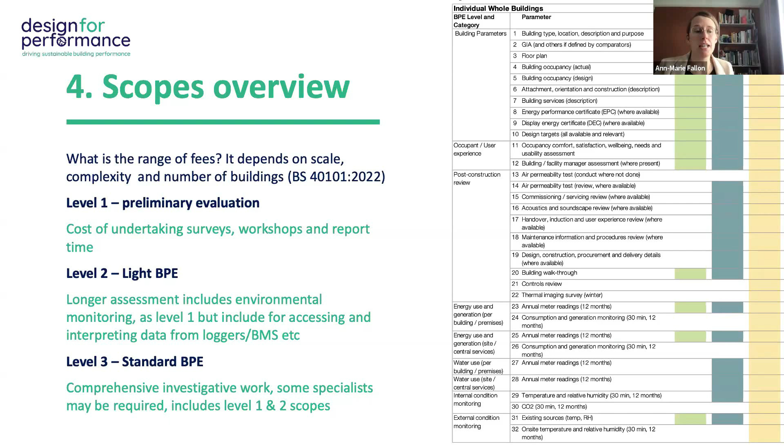So the light performance can be over a longer period of time rather than maybe in a lump sum time, like level 1 can be. And then the comprehensive investigative work, well, how long is a piece of string? That can go into quite a significant fee for adding in services to complete out different elements, or it can be quite efficient if it's your building and you're doing the post-occupancy on it, or it's a recently completed building and has all the information to hand. That helps mobilize on that one quite quickly.

So how have we funded different building performance scopes? Early doors, we've done some self-funding or aligning with PhD students in universities, which is always really great. There's loads of universities in Ireland that are super interested in all of this, so you could just get it done very economically in that way with some really interesting, supportive academics and students.

Contract requirements, so just adding it in as an additional contract requirement, whether that's because they need it or because they're looking for enhanced quality, or they're looking at savings and optimization because they're aware that that can happen. It can be part of the contract sum, so like a risk pot or contingency pot, which takes the adversarial nature out of buildings maybe just needing tweaking in that first year, where a bit of money is put aside that's not defects but separate, for dealing with building performance evaluation findings.

I talked about the compulsory requirements, Scottish Futures Trust requiring that all educational buildings have a building performance evaluation done in order to get the capital drawdown, which I think is really brilliant. You wouldn't give your child pocket money on Sunday to clean their room from Monday for the rest of the week. You give it to them at the end of the week, or you can give it to them iteratively. It's the same kind of process. We just hand over money without any consequence for how that building is then going to perform within that estate.

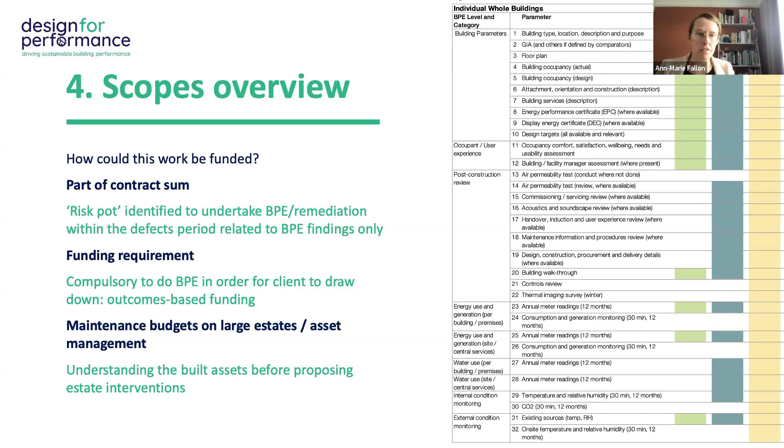And then, as part of maintenance budgets, we've just seen facilities managers on large estates coming to us and saying, look, we really need to just understand this building more. It might not be energy performance driven, but just more user friendly or facilities manager driven, before proposing estate interventions. So it is a separate service, but I believe it really can enhance an evidence-based approach for design, performance-based design, allows collaboration to be much easier at the end of projects and during projects, and helps the clients understand their building estate, and maybe incite a bit of passion or responsibility in how they are managing that built environment before they actually undertake any capital spend. So it can come out of separate budgets, but really enhance the capital output at the very end.

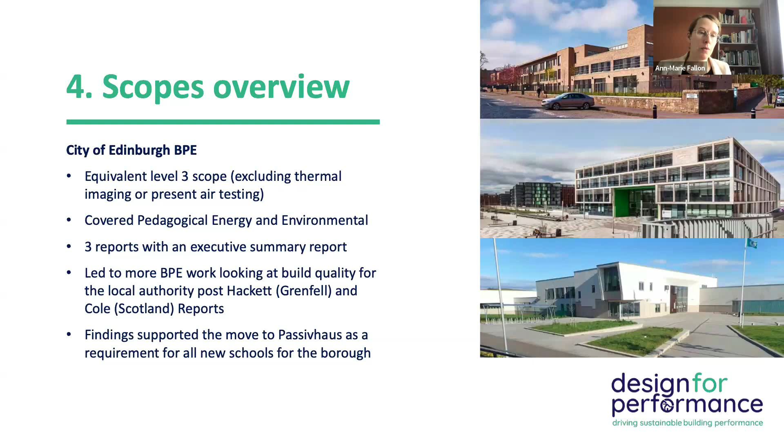So how have we kind of delivered different scopes? City of Edinburgh building performance evaluation, three different architectural projects, two-year level 3 scope, excluding thermal imaging or air testing, but included pedagogical observation days, looking at learning and teaching, and actually led to more BPE work, and ultimately Edinburgh deciding on a policy change themselves for new build passive house schools. So you might think something's a very small piece of a bigger pie, and actually you can have quite a bit of an impact with how you move forward within the processes here.

And this was a separate consultancy, but what we used was some of the investigative scope. So we used the existing billing data from the building to verify the PHPP, the passive house modelling, and also looked at opening up an air test for really understanding the building before we did building intervention. We can also just access data online. The display energy certificates for all the energy performance of public buildings in the UK are available online. We can quickly create a graph of their performance and demonstrate how a performance-driven targeted building can perform a lot better.

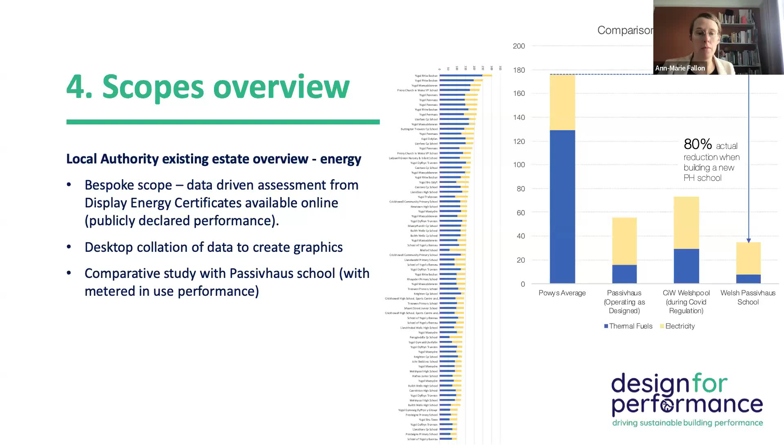With Plymouth Marjon, I mentioned this earlier, we looked at space utilisation surveys and occupant surveys, and essentially concluded with them that they didn't have to extend their campus. They could actually increase their existing floor area by 50% by just utilising the space better, which again is a win-win. You're basically telling a client you don't need to create lots of new buildings. We can do some suitability and remaster planning within your existing estate and free up 50% of the space, which was really brilliant.

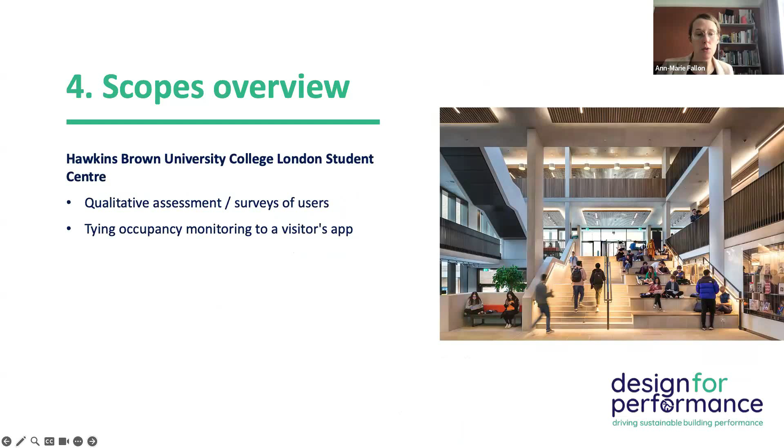And then Hawkins Brown, UCL Student Centre, they're looking at tying occupancy monitoring to a visitor's app, which is another way of digitalizing the whole process of getting feedback on the building. You can develop your own internal intranet platform for these things, where you can log all your buildings in one place and access them.

Depending on the scale of practice and the level of investment you want to put into these things, it's not that expensive to set up, but it's more just the expertise internally to manage and make sure you're linked in the right way. And of course, there's people probably in the room more experienced than I am around AI and innovation and the other things we can do in this field to understand our buildings better.

So just to wrap up over the next few slides, what other things have we learned from building performance evaluation? I've just touched on scopes in that last bit and how we approach different projects, but I'm just going to go into learnings here.

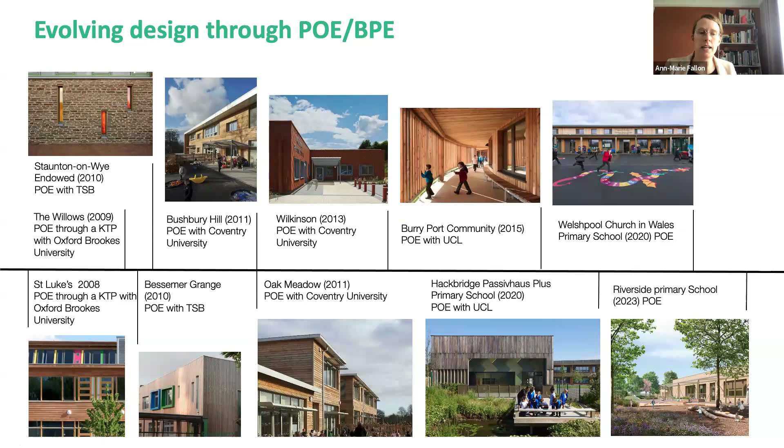We have quite a data bank of buildings now, particularly in primary schools, where we started with some of the technology strategy board funding schools way back in 2010, up to our Riverside case study I showed you in the last section. Various lessons learned around glazing ratios, design, performance, interaction with students, build-ups, all of that stuff has come out in all of that work.

So the outcomes of the TSB funding from Staunton-on-Wye Primary School - it wasn't a passive house school, but it was the best performing building within that school, within the pool of buildings they had at that time. And outcomes of that was that, every project since, we've started delivering user guides.

So that people understand how to work between natural and mechanical ventilation, for example, so there's not this competition or adversarial kind of setup. And also just how some of the performance in some areas, there was air leakage, and the aluminium door in this example was very poor performing. The spec was so much worse than the windows and the frames around it, for example.

And just there was lots of design and user lessons learned in the process that helped us bring forward work over our later projects.

This indoor air quality study was practice and PhD funded, so in collaboration with UCL, and I was on the very first passive house school. So again, there's lots of lessons learned from those schools, particularly around indoor air quality, and that's led on to other research around VOCs. And again, it's all funded alongside a university.

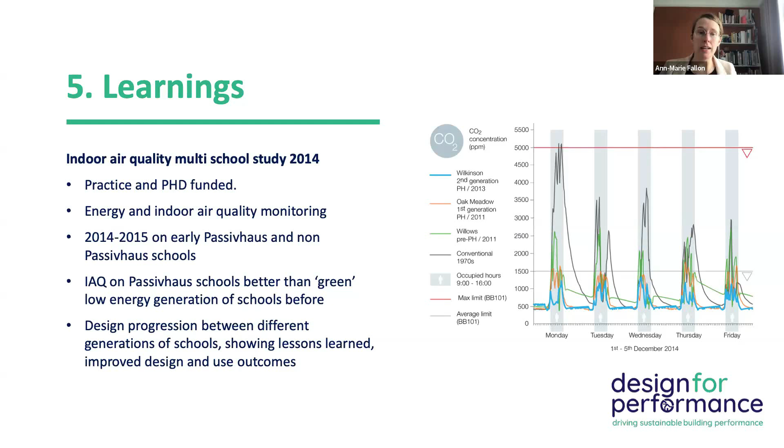And just showing how we've progressed design - we always come back to these graphs. I think people in the UK must be bored of them, but they're a really compelling set of detailed information covering lots of things, demonstrating the different levels of quality of air we can get depending on the energy target that you set. It's interesting when you talk to different audiences, what type of information you're trying to convey. So whilst I love a really complicated graph, it's not really very easy on the eye.

So yeah, just to touch back on Riverside, it performs better than any of the RIBA or LETI EUI targets for 2030, and also the current net zero carbon building standard in the UK. So it's kind of - I wouldn't say ahead of its time, it's kind of how we should all be designing - but it's also delivered on a pretty modest tight budget.

But yeah, we argue, because there's no evidence to support otherwise, because of our own post-occupancy evaluation that has been independently verified, that it is the best performing school for energy and indoor air quality in Scotland.

We can also subcategorize, so we can get energy meters on our services and systems and break down that energy consumption. So again, we need to think about that very early in a design and work with the M&E consultant to make sure that metering is in place for much lower cost, doing it as part of the design than trying to retrofit those types of meters later.

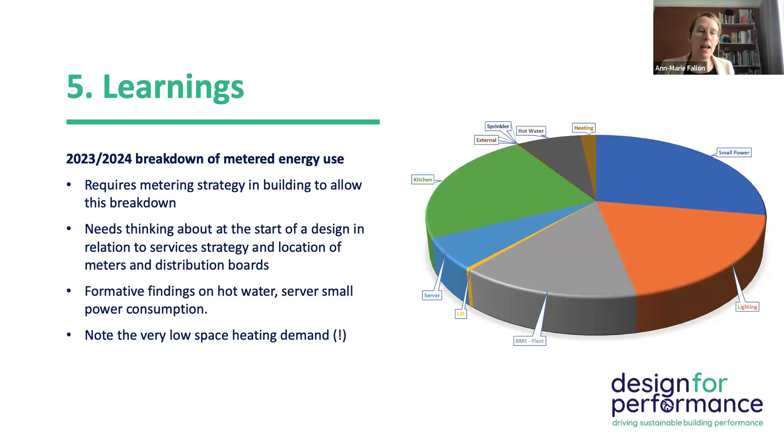And you can see in this example, our heating demand is very, very low in comparison actually to our lighting and kitchen and server consumption, for example. And our hot water, there is a bit of hot water in this diagram that's in the small power. Again, small power and unregulated energy in our buildings is a big challenge within any energy metric or target.

So having a good understanding or breakdown of what that is, is really important. Just arising research out of the more recent Passive House schools is significant air quality findings around hazardous exposure levels to different types of particulates and VOCs. And we can see, with an energy targeted school that focuses on operational energy, it actually also gives an air quality benefit, compelling evidence that there's better performance compared to the business as usual.

And again, how post-occupancy is a really important part of that, or building performance evaluation. University of East Anglia, this is, I think, my last example, was a really collaborative project, the Enterprise Centre, with a really ambitious brief, a very informed client - and I accept all clients aren't this wonderful, of course, but it's always good to have these examples.

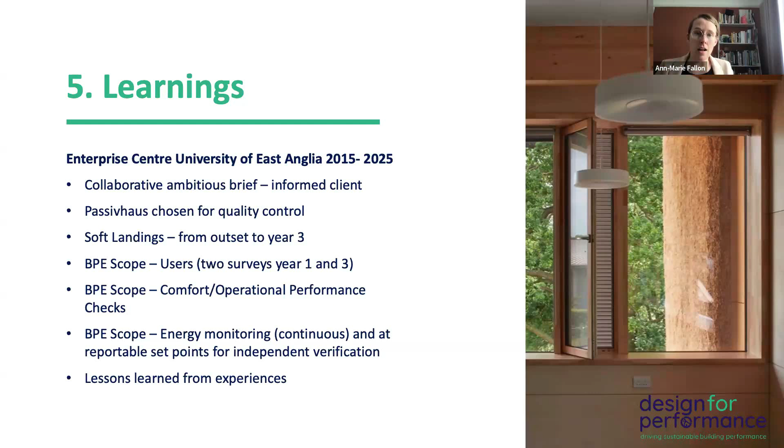And we did a soft landings process, which is a very comprehensive building performance evaluation process that's set out very clearly by BSRIA. There were particular targeted interventions over that time, as well as constant monitoring of energy and lessons learned, which was over a 3-year period initially, but then the university themselves carried that on for another 3 years afterwards. So there's kind of 6 years of data on building performance evaluation, which has made it into various publications - we're achieving the building was achieving beyond targets without renewable contributions, for example.

And again, it's a little bit like Marmite. This building also had a very low embodied carbon target, and we did a kind of thatched straw cladding solution for this building, in respect of the thatchers and crafts in kind of eastern England, or in Norwich - repurposing an existing trade, and giving something that's a waste material a new life and a new kind of attention within the university. And of course, we can look back now online and see that for every year since the building was completed, we've achieved the 2050 target.

So way back in 2015, this building was already achieving what we've now set as an aspirational net zero carbon target for 2050, which is 60 kilowatt hours per meter squared per year. So again, we can deliver to this level. It became in the median range of cost per metre squared for university development at the time, even with the novel materials and the low embodied carbon. And there was a collaboration piece around VE through that period with the contractor as well.

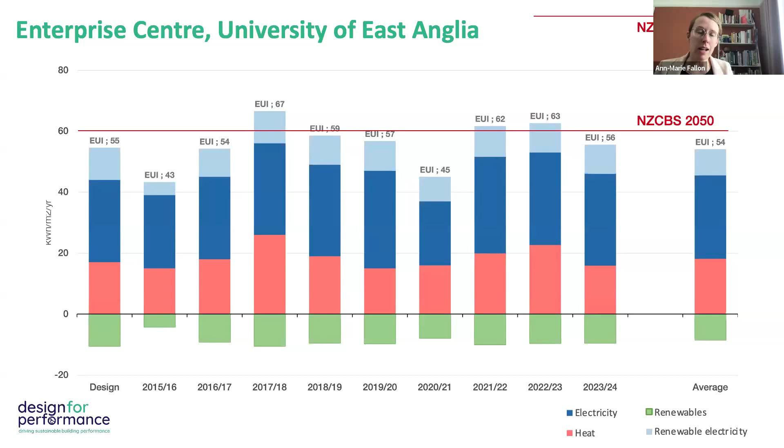And of course, coming back to why we do this with buildings - we want to hear from the users and we want to hear that a building is good. There were some comments in this building about areas that were a bit cold, in the nursery in particular, but the nursery pedagogy in Scotland is around an open door policy. And of course, Scotland has a little bit more of a cooler climate, and so if we open a door in any building, eventually the temperature is going to be a little bit different. But we were talking about maybe a 2-degree temperature difference when we then checked it on the monitors. And there's a different perception depending on when different staff are there. But, you know, there's always a cohort or a space that may need a bit of work or a bit of revisiting. Overall, there's been positive qualitative feedback about the performance of that space.

Going back to Stewart Brand's How Buildings Learn, this isn't new. This is something that should have been part of our tools for quite a long time. But our contractual context sets us apart from really embracing that, and I think we need to reverse back to that era where we really want to know what happens after a building is built.

Just to wrap up, the benefit of doing building performance evaluation, I hope I've explained that across the slides. There's lots of opportunity there for us to improve our design ethos, our service, maybe earn more fee, but also create better evidence-led design and assist in collaboration.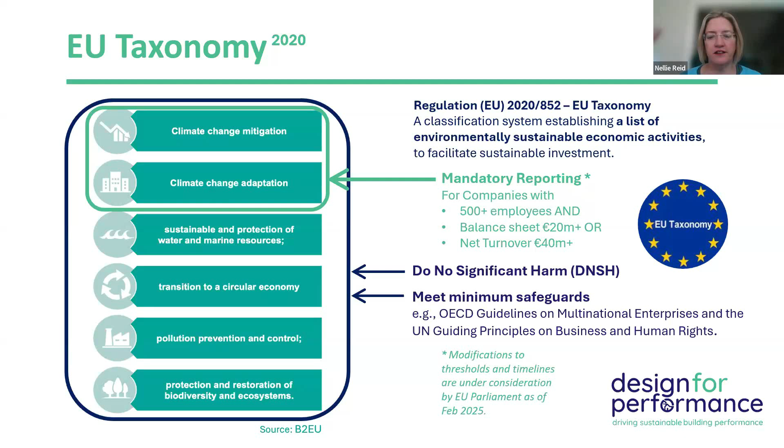So these are all happening not at the architect's level, but at your client's level. So the people who are building the building, they're the ones who have to do the EU taxonomy reporting. It's just useful to be aware as architects that this is what they're dealing with on their end. And so as we approach this design for performance, it's how can our design help them align with these goals.

Then there's also, in connection with the European Green Deal, the EU Climate Action Law, which sets new targets. In 2023, two years ago, there was 37% less emissions achieved compared to 1990. The target is still 55% by 2030 and climate neutral by 2050.

The Energy Performance of Buildings Directive, you may be familiar with it, but basically it's been recast or updated from the original. So instead of the NZEB standard, it's now ZEB, zero energy buildings, by 2030.

So the overall target of 55% less emissions by 2030 is for the whole of the EU and within each country. But when we look specifically at buildings, the target is for new buildings to be zero energy buildings by 2030. That's because for buildings, the technology and innovation is there for us to do that with new buildings, so they need to go beyond that 55% emission reduction and go as far as they can to achieve zero energy buildings.

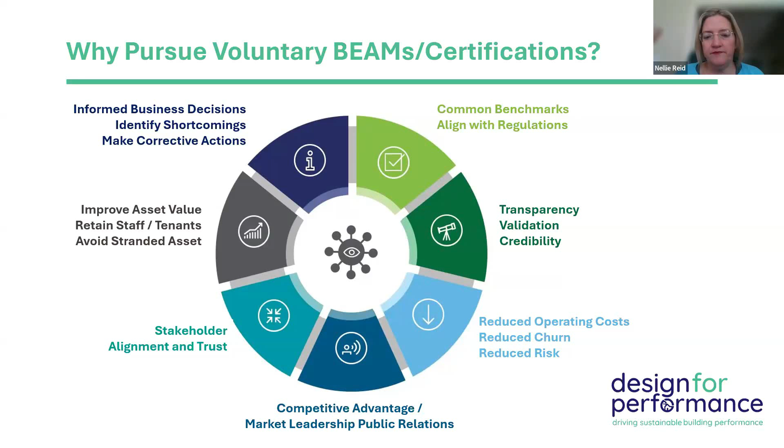Also, for resale value, if you're selling a building and it's got a rating, it improves the asset value, and that's been shown in studies that buildings with voluntary certifications attract a higher resale value. It also avoids stranded assets, where you end up with a building that's maybe 15 years old and underperforming, an energy hog using a lot of energy, and a tenant vacated after a 15-year lease, and you can't get a new tenant in because they ask if it's BREEAM certified. So it can help boost market competitive advantage if you have that certification.

So BREEAM is the first one I want to talk about. Even though BREEAM started in the UK, there is a different BREEAM certification in each country, so it's not a one-stop universal certification system. It's customized and based on the building codes in each country, so BREEAM for Ireland is different than BREEAM in India, and different than BREEAM in the US.

But it was kind of the first - it was launched in 1990, so it was the first of its kind of this assessment methodology for green buildings. That's the important thing, that it's been around for a long time and kind of set the tone for other green building certifications.

Similar to the other rating systems, you'll see they're all rated a certain way, but in BREEAM, based on how many points you get, there are different levels at different ratings. And there's BREEAM for different project types. So one of the consistent messages here is that with all these rating systems, they have customized versions for refurbishments, existing buildings that are occupied and in use, homes, communities, and new construction.

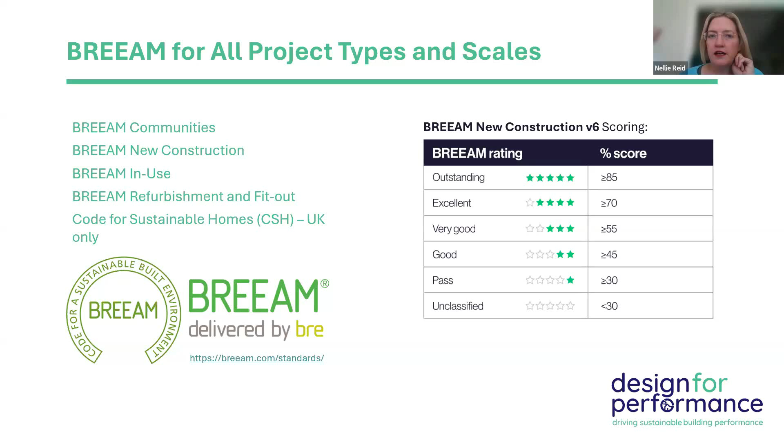And the interesting thing is it was someone, Nigel Howard I think was his name, who was with the BRE and moved to the United States, becoming one of the founders of the US Green Building Council, which created the LEED rating system. So it started in the United States by the US Green Building Council, but very quickly expanded internationally.

When I moved to Ireland in 2011, I was on the international roundtable, which was basically figuring out how to create alternative compliance paths for LEED in Europe. So it was looking at what was the normal standard of practice in Ireland and how to benchmark LEED against the standards there. There are slight modifications to the LEED rating system, called alternative compliance paths, in Europe, and every region has a similar setup. The idea is that it's one rating system with slight modifications for different regions.

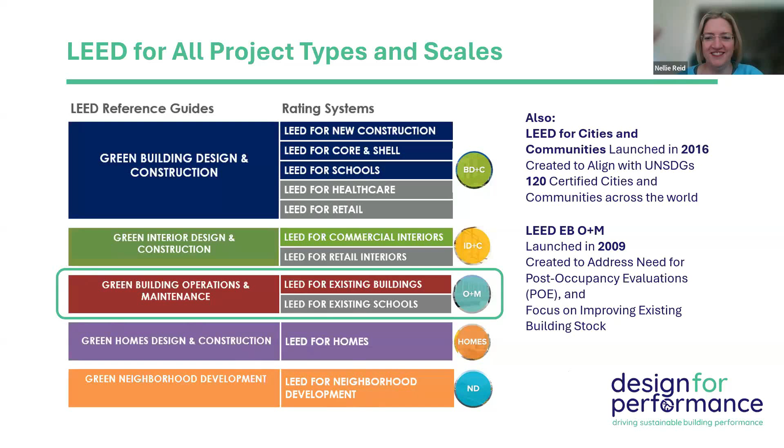In LEED there are prerequisites and credits. The important thing about prerequisites is a building is not eligible for certification unless it meets all of them. Sometimes a client says, 'oh well, we're not going to meet the minimum indoor air quality requirement, is that okay, do we just not get points in that category?' No - if you don't meet a prerequisite, you're not eligible for certification. There are prerequisites for energy performance, for water, for waste, and for environmental quality. If those prerequisites are not met, you're not eligible for certification.

So just to look at this a different way, looking at it over a project life cycle - this ties back into design performance and early engagement in the process. But LEED, up until now, the conversation always starts with new buildings or new fit-outs.

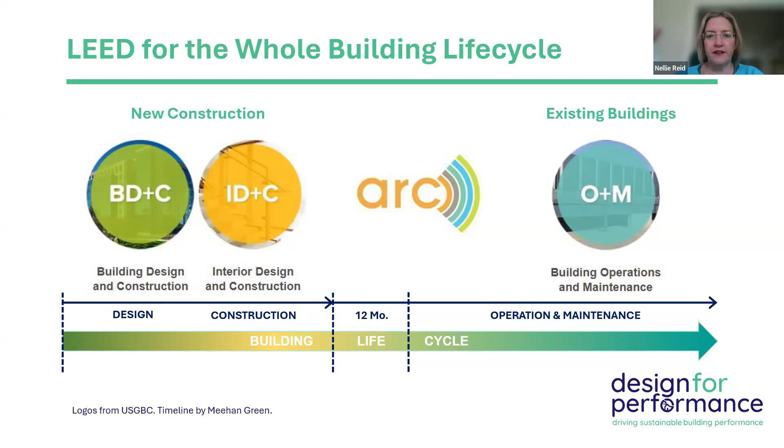And then the human experience - doing post-occupancy surveys and testing indoor air quality for CO2 and total VOCs. If you have a BMS system in the building that can track all of these things, that's the ideal scenario, where all of this data could come from the BMS system. And then lastly, the transportation survey.

This is really important too, because part of the carbon footprint of a building is the people getting to and from it. So what LEED O&M does is ask all of the occupiers of the building, anyone coming to the building, to fill out a survey of how they get to work, how far they come, what mode of transport - and that gets fed into the certification as well.

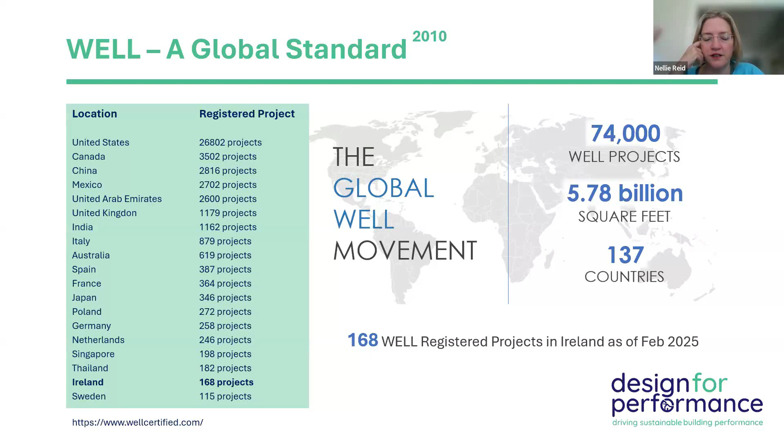There isn't a lot - I don't hear a lot in the news about WELL certification in buildings, but it is kind of a big thing, especially for the multinational companies based in Ireland pursuing WELL certification.

But then there's also overlaps with LEED in terms of materials, air quality, water quality, and thermal comfort - so there's overlaps between LEED and WELL.

Sorry, is someone speaking? Okay. Hopefully everybody can still hear me.

DGNB was started in 2007, going back a little bit further. It was launched in Germany, and it's a second generation assessment method, meaning it's the first voluntary green building rating system that came out after there were EU regulations.

BREEAM and LEED came out before there were EU regulations, and DGNB came out after, so it's the first one fully aligned with EU, the Energy Performance of Buildings Directives. It's also the first one aligned with the UN Sustainable Development Goals, the EU Green Deal, Circular Economy, and the EU Levels Program.

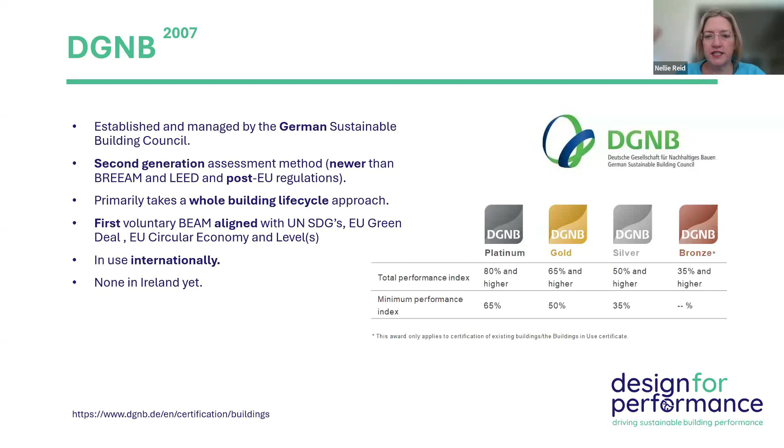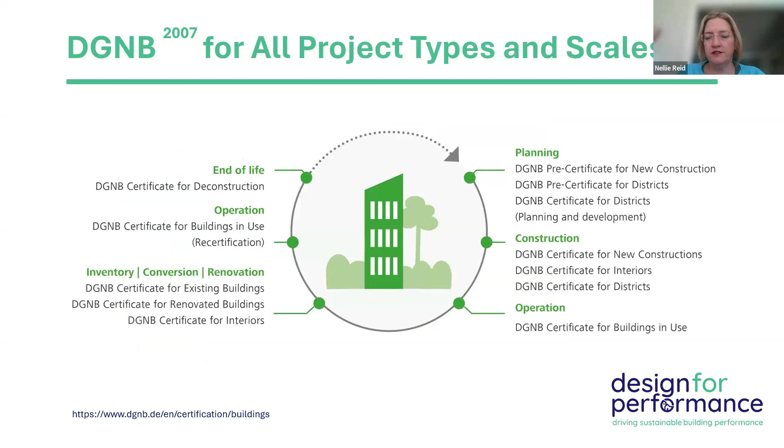Similarly, in DGNB, you can see the credit categories are very similar, and it's kind of more of a balance between economic, social, and environmental. You can see that the triangle of ESG comes in all of these certification systems. And it's also the full life cycle of the project, from planning, construction, operations to end of life. So again, all of these certifications can be used throughout a building's life cycle.

EU Levels, just to bring this onto the table too, was created to help align with the EU taxonomy and the Energy Performance of Buildings Directive. So this is just another kind of rating system that's EU specific. It's different than LEED, BREEAM, and WELL, and all these other certifications.

It's meant to be kind of a common language to create indicators to assess office buildings. This is also something that probably the Design for Performance program is, I imagine, somewhat aligned with, the EU Levels to some extent.

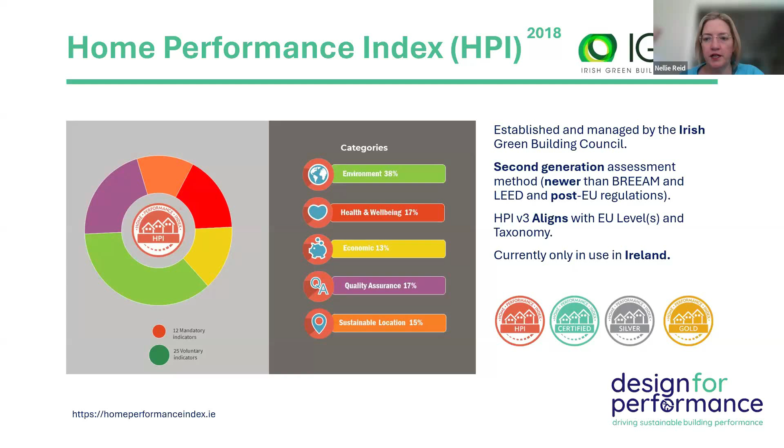And then the Home Performance Index is a program that was launched by the Irish Green Building Council - that's the Irish-based home performance index for residential. This is very much aligned with EU taxonomy and also the EU Levels program. So even from a circular economy perspective, like embodied carbon analysis, the LCA model for HPI is directly related to EU Levels.

Often in projects, early engagement is so important. When my company gets contacted to get involved in a project, the project is often already in the middle of a design stage - it might be in design development, or almost going out to tender. It could be a month before they're going out to tender and they say, oh, we want to pursue a LEED certification, can you assess our design?

When you get involved at the design stage, it's almost too late, because I'm literally just assessing it against a benchmark, but not using the rating system to influence the design choices. So really, the best time to get involved is when you're defining the targets and defining the project, in pre-planning.

Before you go in for planning, if you're going to target a green building certification, that's the time to do it, because it has to be fed into the budget for the project and into the workflow and all the requirements for the architect, the engineer, the landscape, the lighting, and the acoustics. All of those consultants - when you send out an RFP for an architect, you need to say, we're planning to pursue LEED Platinum, WELL Platinum, and they need to price accordingly, and make sure they're prepared to deliver the project that meets these targets.

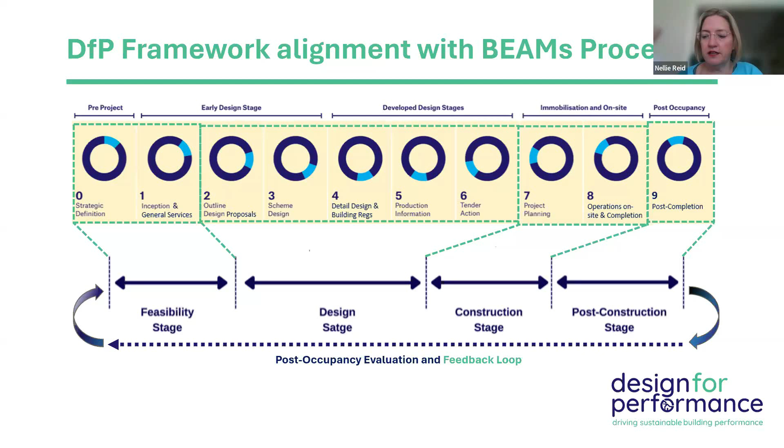On the back end, this is where, in the last 15 years in Ireland, we've done really well at the middle of this - achieving green building certifications at design and construction stage - but then everybody walks away. So going back and doing that post-construction evaluation, post-occupancy evaluations is so important, because it provides feedback on how to correct anything that's wrong, or how to make additional improvements and improve the performance of the building.

What's on the horizon? Just to put a bigger perspective on this - we've been talking about green building certifications at the building level, but at the portfolio level, part of what our clients are talking about is how does my portfolio look. When they're doing their annual sustainability report, they want to be able to look at the whole portfolio and benchmark themselves against others.

So a lot of clients are pursuing GRESB. It's a global real estate sustainability benchmark, and it's for an entire portfolio. It aligns with the UN Sustainable Development Goals, levels, taxonomy, all of these other reporting mechanisms, and green building certifications tie into that.

So it just shows that the certification process is just part of a bigger picture of what's going on. Really, just to leave it here - everything I've just talked about with the green building certifications and the EU regulations, that's all about reducing the negative environmental impact, going from really poor performing buildings and sick buildings and buildings that generate a lot of waste, to where we have less of a negative environmental impact. But really, what needs to happen next is thinking about how we can have a positive environmental impact, and actually have buildings be contributing to a better environment instead of just less bad.